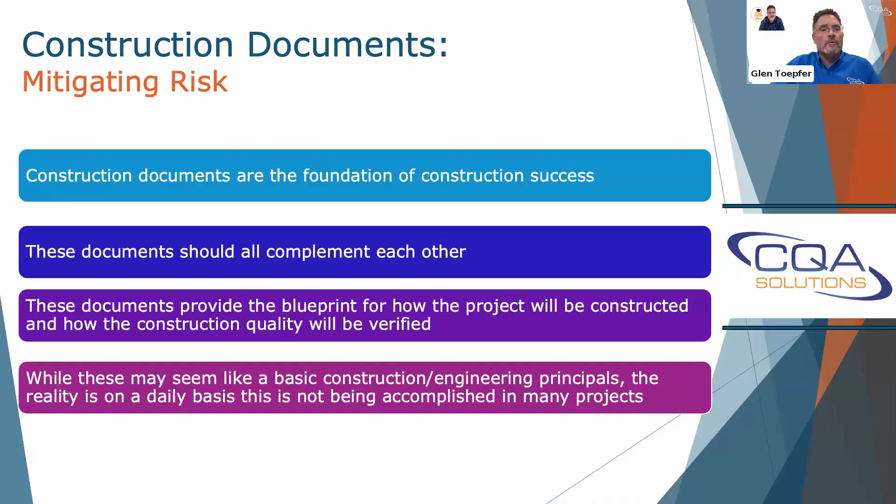And these seem like basic principles, but we're seeing them not being accomplished on a daily basis on a lot of projects. And as I mentioned, it leads to problems. Also, the importance of this guidance. These are quotes from over the years.

"The owner has pushed me to the limits of my comfort in certifying this project," from certifying engineers. "The regulatory agency approved it." "The owner isn't going to want to hear that we need additional work." So the regulatory agencies out there give their blessing to something, and something changes, and engineers are reluctant to do anything about it if it's changed.

And then, "If it's not in the CQA plan or technical specifications, I can't enforce it." That's a huge one. I hear that a lot, and sometimes I agree with it, sometimes I don't. But that's why we need to make sure some of this stuff is in there, because we're seeing a lot of issues come out of it.

Here's the different types of issues that we've been seeing on the construction documents: cut and paste, missing information, conflicts between the documents, incorrect information, and outdated documents supplied to the CQA firm and/or contractor. We've seen it all over the past year.

Missing information, this I really felt like it got worse, just because it seemed like we saw more of this on the projects on which we were involved. Batten strip details were missing on projects, specifications for the batten strip, how to attach it, how wide, what the material had to be.

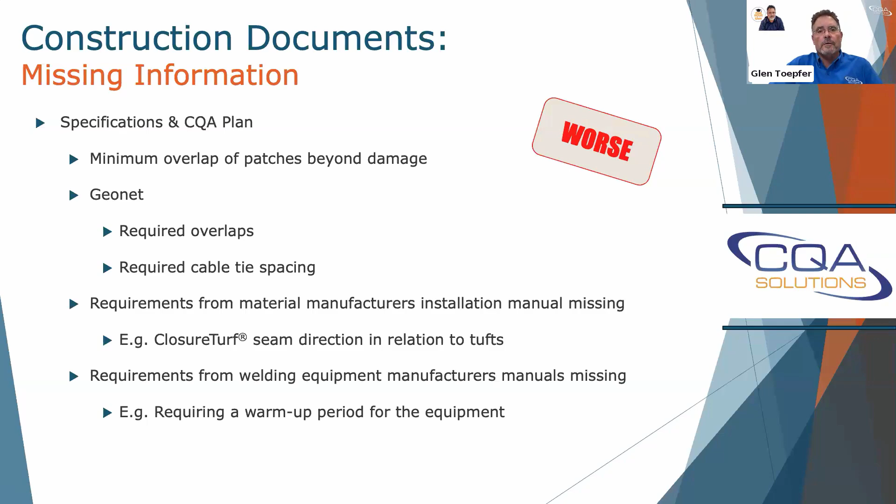Requirements from material manufacturers: ClosureTurf, seam direction in relation to the tufts. Requirements for the welding equipment manufacturers' manuals are missing in most cases. They're not even referred to, but requiring a warm-up period for the equipment. We constantly see people turn on the generator, grab the extrusion gun and go, and there's no warm-up. And you read the manufacturer's guidance documents, and they're supposed to allow it to warm up. I think it should be spelled out, and it'll help improve quality on the projects.

Conflicting information. There's no change, different information this year, I think, than what we had last year. But dwell time: technical specs say 2 minutes, CQA plan says 5 minutes. What do you go with? Air pressure drop, 2 psi versus 4. In trial welds, 2 peel, 2 shear; CQA plan, 5 peel, 5 shear. And destruct minimum frequency, 1 per 500, 1 per 1,000 lineal feet.

How do people review this? How do you certify it with these differences? It just seems to raise a lot of questions, and a lot of times it causes a lot of hassle in the field, especially when the documents don't match like that, and there's a big difference.

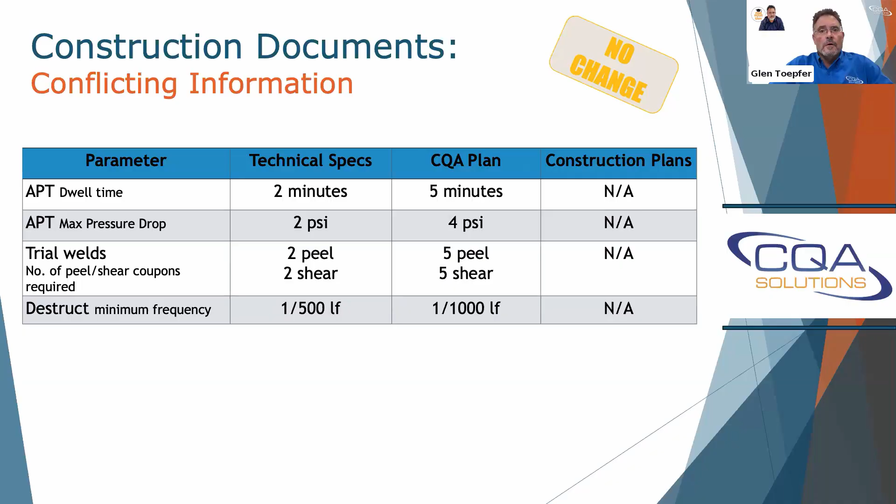Incorrect information and practices. Earthwork: we had a project or two where we had acres and acres of clay. One proctor was provided for a 300-acre project, and then the stockpile borrow was compiled from excavations spanning a decade.

Geosynthetics: for seam destructive sample failure, capping just a seam that failed was acceptable. Last year I think we had one where cutting it out was acceptable, like the destruct failure didn't exist if you cut it out. But these failures can go beyond just one seam, so these aren't the best specifications.

Fusion machines must be calibrated 2 times a day. What does that mean? I don't know what that means because the calibration is done by the manufacturer. Maybe they mean trial welds, maybe it's a typo. But how does anybody let that go? And it's put in there and people go through the project without catching that.

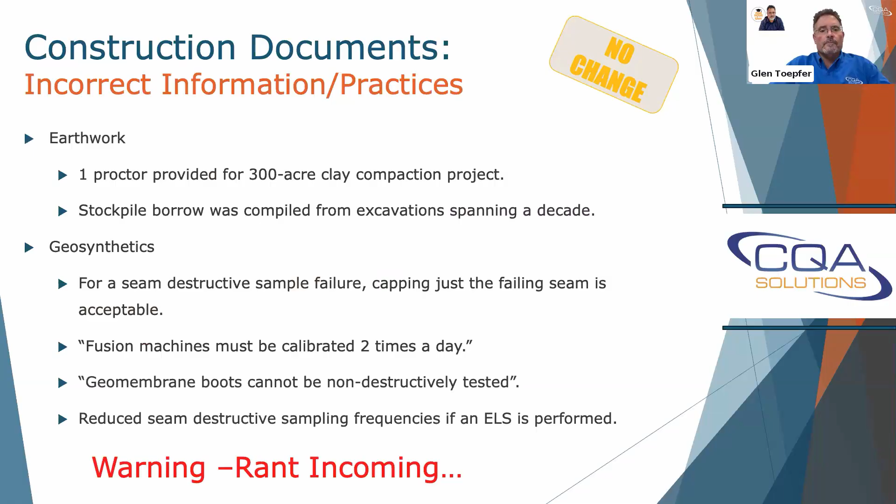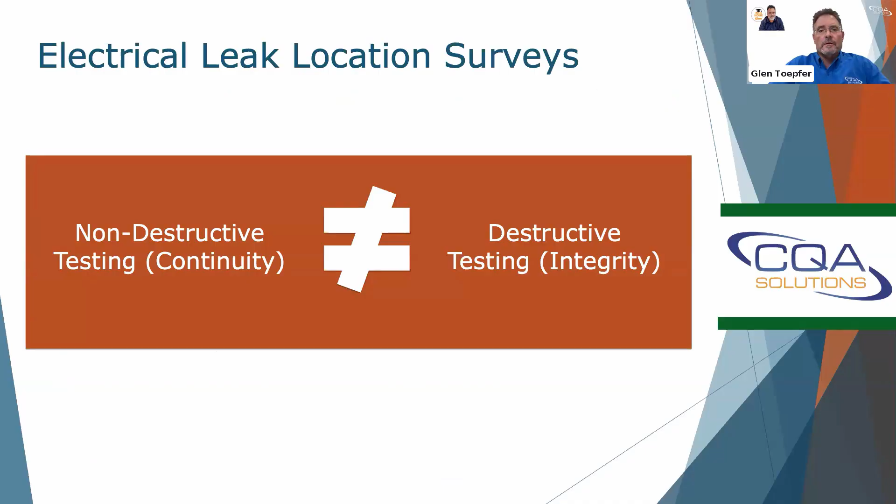Geomembrane boots are stated that they can't be non-destructively tested. And then reduced seam destructive sampling frequencies are allowed if electrical leak survey is performed. And, yeah, I got a rant on that. I've been saying it for years. Electrical leak location, non-destructive testing, continuity testing, which is an electrical leak location survey, does not equal destructive testing, which is your seam strength, the total quality of the seam. They're not equal at all, and we got to get this through to people so they understand this.

And I'll give my basic example, what I give in all our training classes. If you have a conductive backed material, 60 mil material, your conductive formulation is going to be roughly 3%, or 2 mils on the back side there, and your standard formulation is going to make up the remainder. So you could have a scratch or a gouge down 95% or so, even more. As long as it's not touching the conductive layer, it's unlikely to complete the circuit that's going to indicate that there's a leak.

So your integrity, your strength of your material is going to be greatly compromised. You got a scratch that's 10%, 20%, 30%. You're not going to get the same tensile strength and elongation and break strength. And people don't realize that. And so this stuff gets compromised because we're substituting a good technology, but we're substituting it inappropriately.

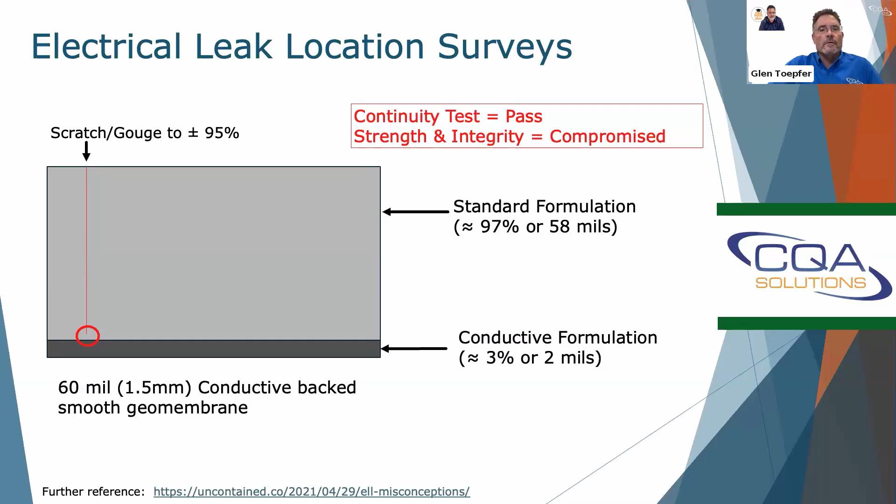Some construction practices, outdated practices that we see: topping of a failed seam is allowable in some specs, and it's largely outdated because you don't want to reheat. An isolated bead here or there we still see, but topping typically means you're going to be putting feet of extrusion down, so you might fix 20, 30 feet of a seam or something.

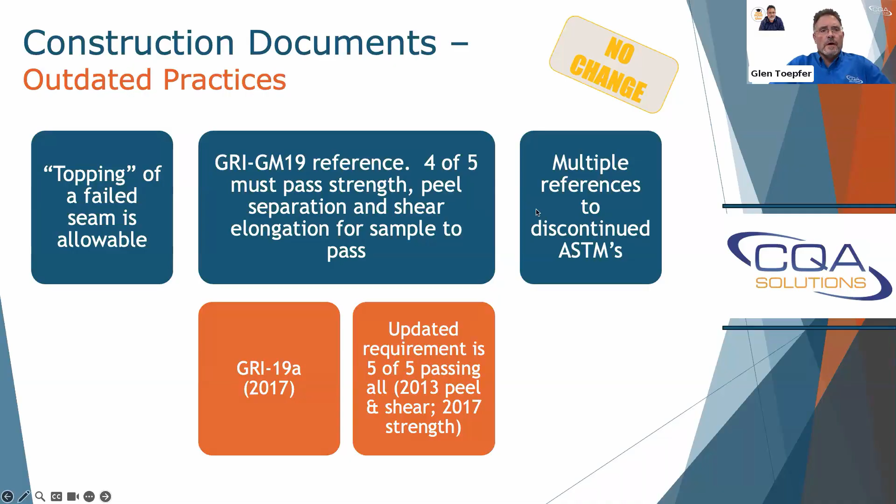Improper reference to GRI GM 19. It was changed back in 2017 to where it was broken up into A and B. And we still see the 4 out of 5 must pass peel strength, peel separation, but the updated requirement is 5 of 5 have to pass all. And it's been that way for a while. And it's still out there, and people are still interpreting it the old way, which I think just leads to quality issues in the future. And then multiple references to discontinued ASTMs. We continue to see that throughout the projects.

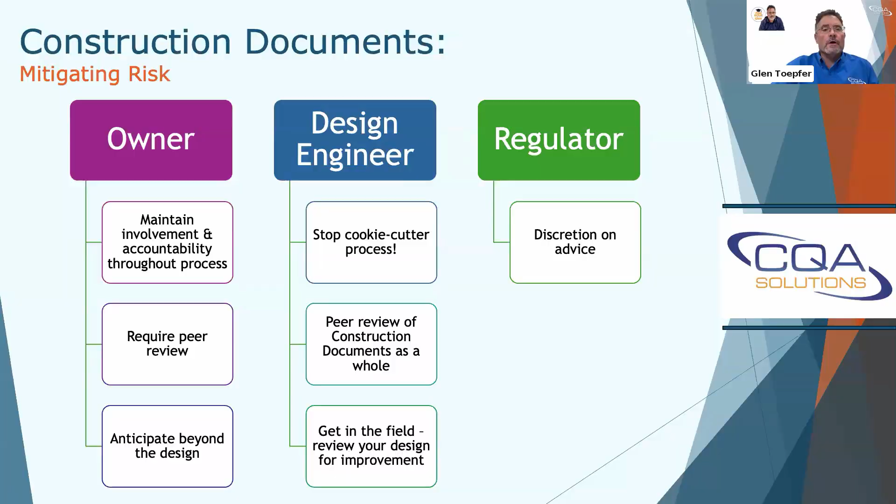And regulator, again, discretion on advice, see what the engineers actually know. If you're approving something, you know, they're gonna be reluctant to change their mind and go against what you're saying is good.

Project planning, pre-construction meetings. Some of the big issues we see here is that CQA is often left out, almost always, and relevant installer personnel are left out. There's no formal agenda, no site walk, and then you question whether parties have even reviewed the construction documents because of the aforementioned items. You see these things happening. How can we be partway into construction and be asking these questions?

Impacts, like I mentioned, you get delays, increased costs. An example, cold weather seaming, GRI GM9. It's not just plug and play. People get there and we're like, oh, we're down to 32 degrees or 40, whatever your cutoff is on the specs, and they want to implement GRI GM9, and there's things that need to be discussed by the engineer and approved by the engineer ahead of time.

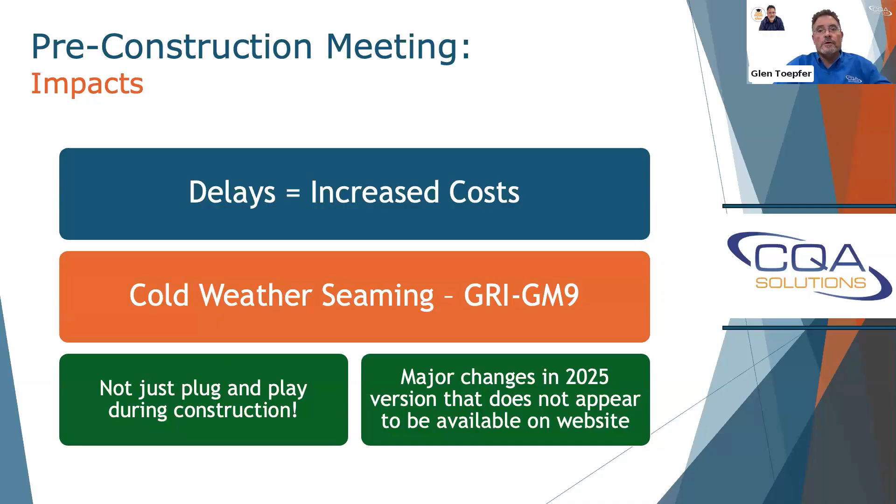And then also in 2025, there's major revisions, but I don't see that on the website last time we checked. So, is that out there for the public? I'm not sure. Some suggestions, obviously for the pre-construction meeting, include CQA and include installation foreman, come prepared with an agenda relevant to the project, come prepared with a summary of conflicts needing to be addressed.

At Palo Verde, where we had the zero leak project, I had pages and pages of notes, and they all had cross references to the CQA plan, the tech specs, RFIs, and we spent 3 or 4 hours going over it as a group with the installer, the owner, CQA, engineers, the whole team was involved. And that's how we got it to where everything was resolved for the most part before we're in the problem. You still run into some things here and there, but it was 99% resolved, and it made the project run much more efficient and increase quality.

Perform a site walk with all parties. A lot of times that can help avoid things like cutting the wrong materials at a tie-in, things like that. People need to know what the limits are.

Project planning, CQA staffing, we still have been seeing the same kind of CQA staffing issues, lack of experience, don't understand the role. There's a lot of people in the industry that don't understand the CQA role and they think it's just documentation. And there's people out there pushing, hey, we can replace CQA by data recorders, and that's not our job as CQA. Sure, we do gather the data, but the data is secondary. We have to be making sure that what's in the specs, what's in the plans, and what's in the CQA plan are being followed and done properly.

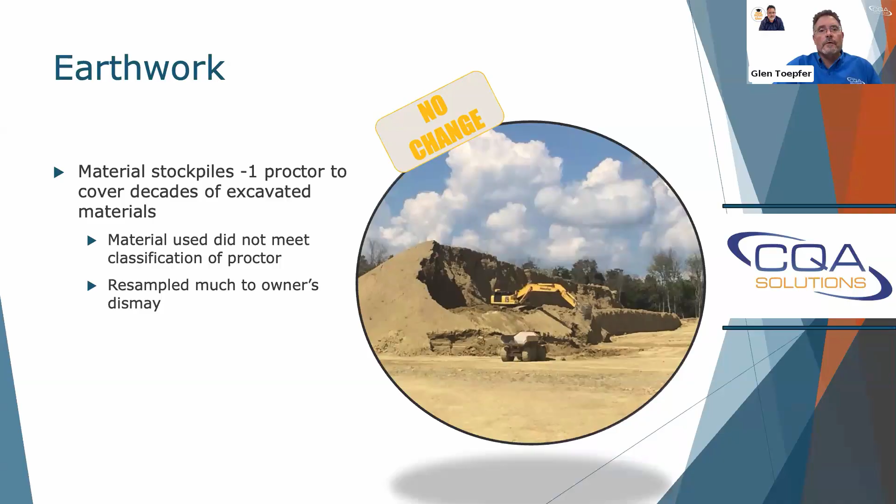As I mentioned earlier, as an example, we had the one site where we had one proctor to cover decades of material that had been excavated, and our people get out there and they're like, the classification doesn't even look the same, looking at a grain size just by hand, and we had a resample, and ultimately we had passing tests and things were working out, but the owner wasn't happy that we resampled, and I don't know how they couldn't have had other proctors out there on 300 acres. That's hard to imagine.

Earthworks, the communications, this is kind of a new development this year that we hadn't experienced: the contractor had insufficient material for construction. The certifying engineer was on vacation and the assistant engineer made a decision to reduce slope and the final grades, so that would help accommodate the contractor and the material that was on site. But the certifying engineer luckily got back before the construction was finished. And he said lowering that was unacceptable and they had to bring in more material and get it all approved. But communications and who's authorized to do what, that's critical. People all need to be on the same page and things like that shouldn't happen.

Desiccation, every year this is an issue. What we're seeing is no change in it. More and more people are starting to seemingly say, oh, your subgrade doesn't have to be perfect because we're doing a leak location survey. Again, it doesn't make sense. You want your subgrade to meet the requirements. Your clay should meet the requirements. If you have a permeability requirement and you have desiccation, that top several tenths of material is probably not going to meet the permeability requirement, and it has nothing to do with a leak location.

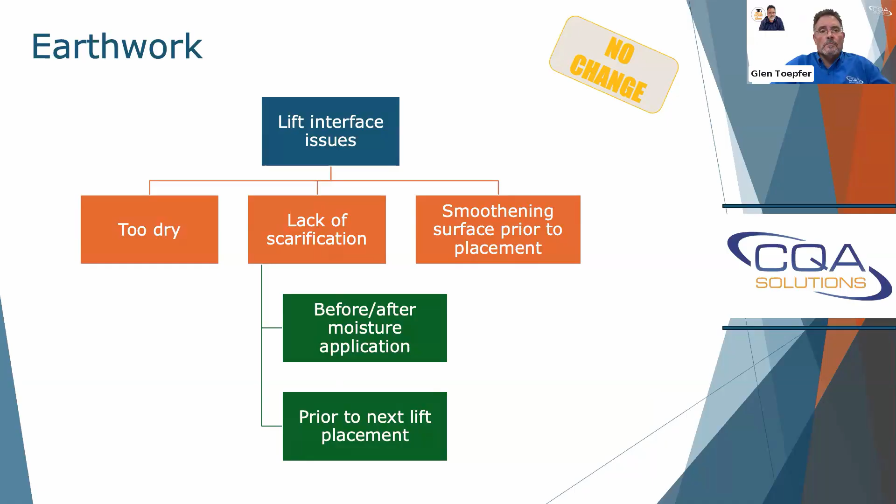Earthwork interface issues, we continue to see it all the time. People are placing too dry at that lift interface where the two are bonding together, lack of scarification, moisture is added sometimes prior to the next lift placement, but it's not worked in like it should be to get a uniform moisture. And so you end up with issues. And then smoothing is another one because they run over it with the hauling equipment, the smooth tires, and it doesn't get roughed up, and you end up with smooth clay that's not bonded between lifts.

Again, I mentioned earlier the desiccation. This is a big one - no moisture conditioning on holidays. You need to add this into your plan. A lot of contractors take off 4th of July, Memorial Day. They don't have anybody out there watering the clay subgrade, and it gets desiccated. They come back, add some water to the surface, roll it, and think it's all fixed, but it's not really fixed. You might not have the permeability there, and a lot of times you won't if it's sat and dried out for multiple days in the summer.

Geosynthetics, moving on here to geosynthetics, start with safety. On the safety side, we continue to see safety guards are removed from the tools. That's one. People sometimes aren't wearing the proper PPE when they're using their utility knives, but removing these safety guards continues to be a top issue in the industry. We want people to be safe, and this is one of the things.

Another one is proper crossing of anchor trenches. I didn't put a slide in here for that, but that's another one that we see quite frequently. Nobody uses a bridge, people still jump across it, and that's a big risk for getting hurt.

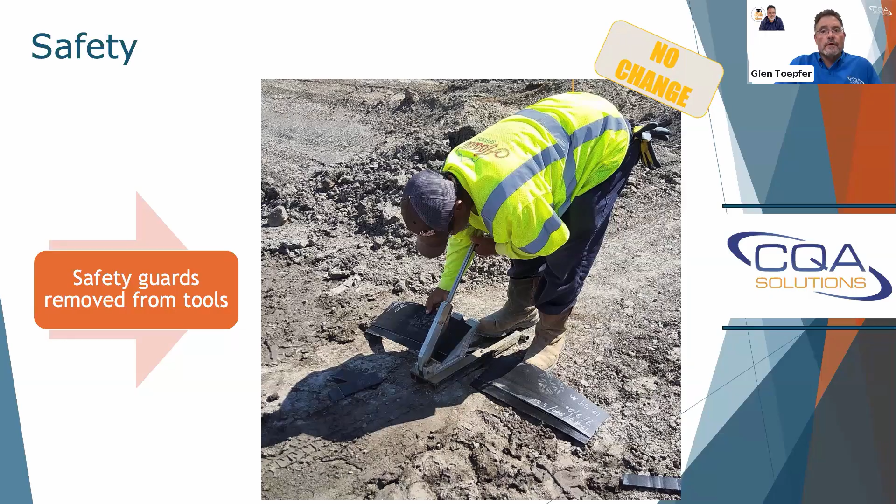Communication - surprise, there's more liner crews on site the next day, and it still continues to happen. It's been better on some of our projects, but overall, feedback from people is that it's still ongoing, and you can't assume just because they put more people out there that those people know the specifications. Firsthand experience, a lot of times those crews don't know the specifications. I've had some major issues where they come out, bring more people, try and do something, and it sets them back a week because they did it wrong, and now we got to redo stuff.

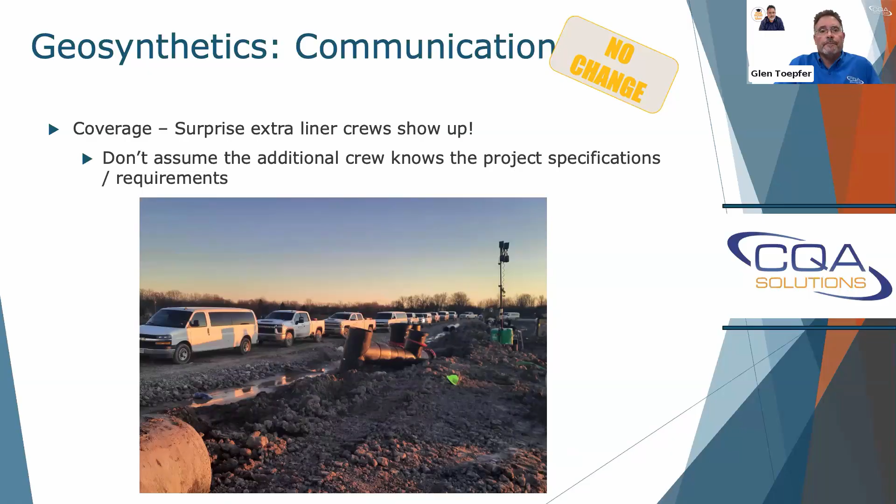Geosynthetics communications - the CQA personnel in the field, what we're seeing is they're not provided with an approved inventory list, not provided with approved panel layout drawing, so they can't enforce these things. No specification summary, or they do have one and it's missing information, or it's improperly prepared. We see that they're missing field equipment such as measuring instruments, missing their field forms, missing electronic tablet. If they don't have these resources, how can they do their job? They can't. And it's a shame, but we're seeing this stuff in the industry. We've got to be better prepared and rely less on the installer, especially when you're CQA anyway.

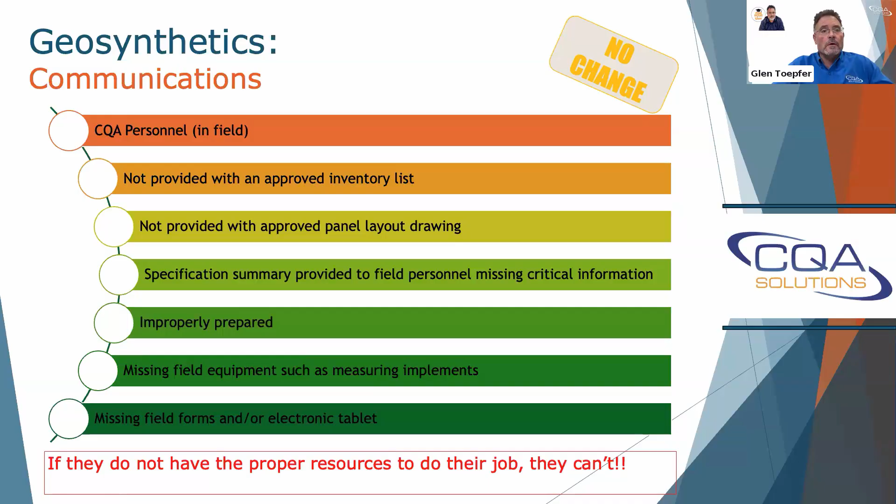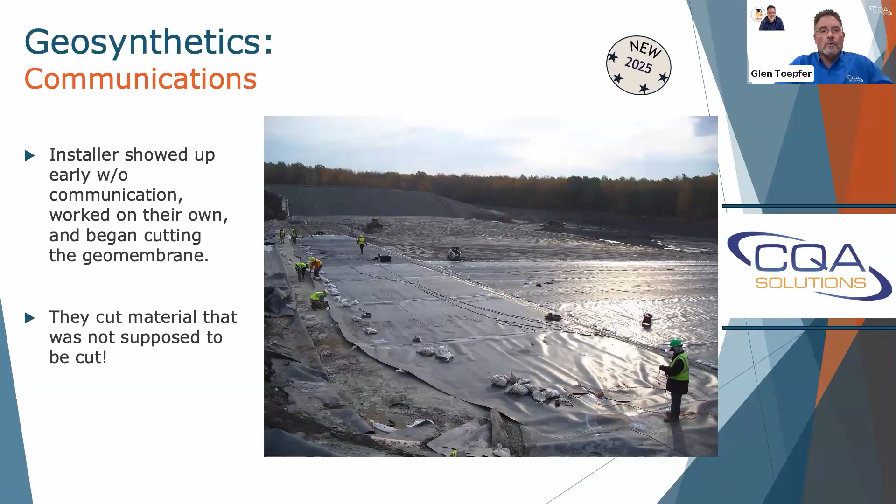We had this project here - the installer showed up early without communication. They worked on their own, began cutting the geomembrane. Turns out they cut material along the tie-in they weren't supposed to cut. And that's where it goes back to a site walkthrough, making sure you have all the proper parties there during the pre-construction meeting, so that way this stuff can be identified. They should notify somebody if they're going to be doing work anyway on a certified project, but they didn't.

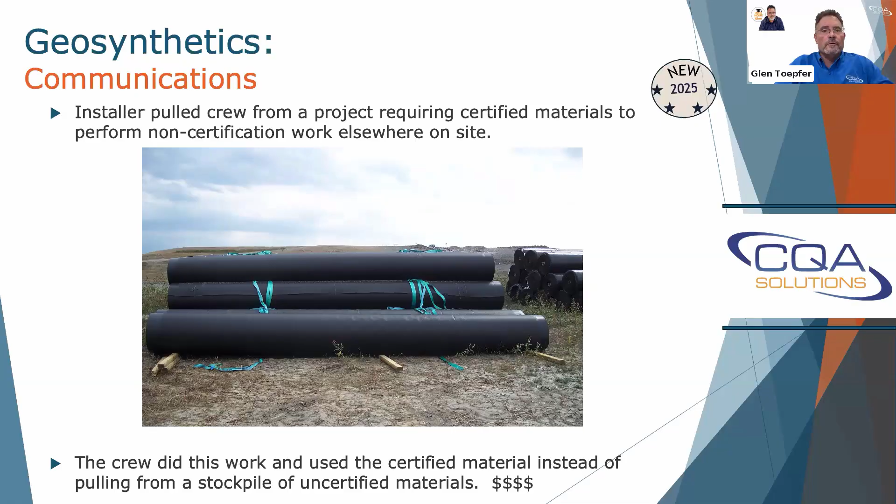Same thing, several times we had installers pull a crew from the certified project we're working on, doing CQA oversight, and they went to do non-certification work elsewhere where CQA technicians weren't needed. In one case, they did this work and used the certified material instead of pulling from the stockpile of uncertified materials. That cost the owner a fortune in getting new materials that had to be certified, and caused delays in getting that material.

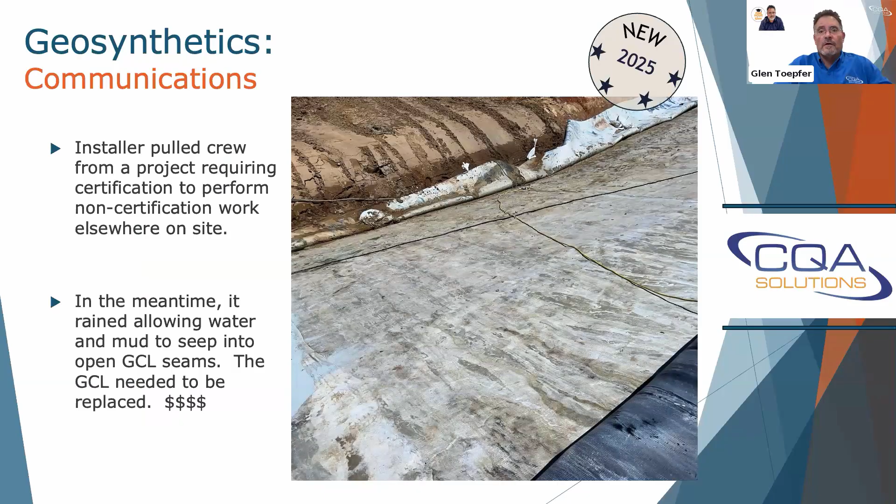Similarly, they pulled the crew on a different site, and in the meantime it rained and they got mud and silt in the GCL, and they had to replace the GCL. Again, a costly mistake, and that should have been prevented. Everything should have been battened down before they left and went to the other part of the project.

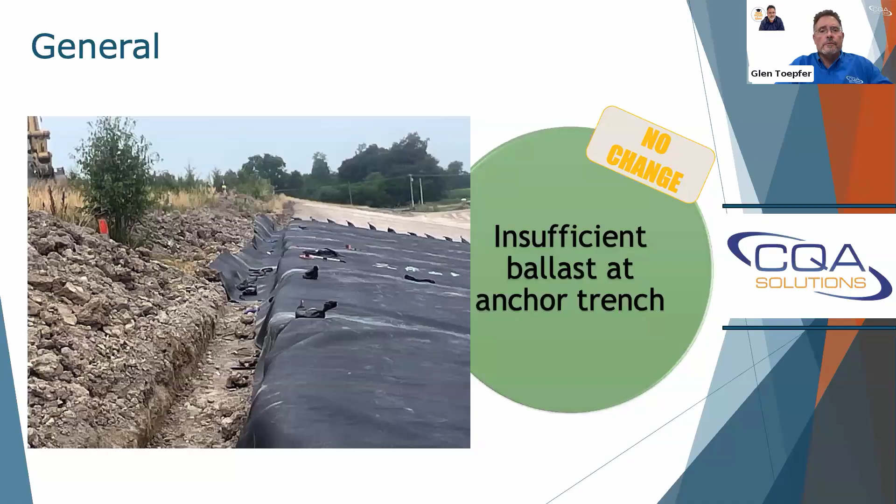Insufficient ballast at the toe of the slope - we continue to see that. Same thing with the anchor trenches. Rub sheets, no change here. They're rarely required on CQA plans, and a lot of times you see people aren't using the rub sheets, and a lot of this incidental damage that occurs on geomembrane projects could be avoided with the use of rub sheets. You're not going to get it all, but everything we can reduce - the amount of damages is the amount of repairs - increases the quality of your project.

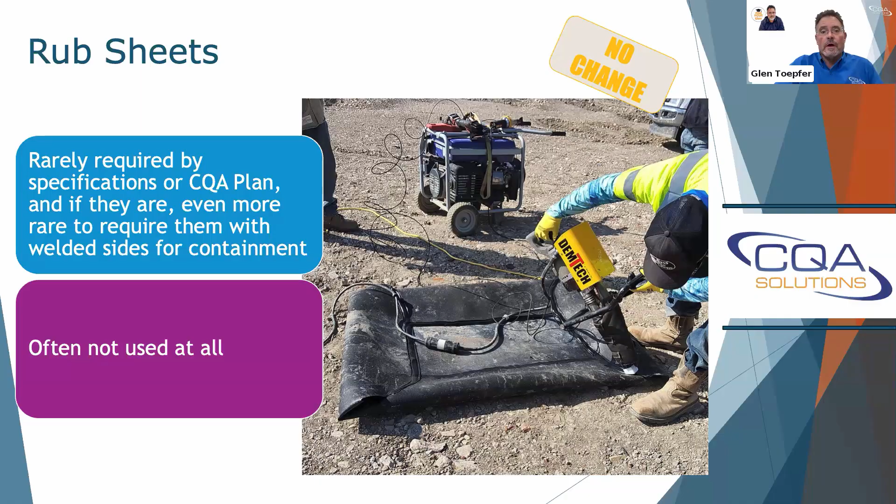And I think the containment sides help. If you get a spill, you don't want the gasoline or something going on the geomembrane. We've seen funky things happen with generators from time to time where they start spewing stuff.

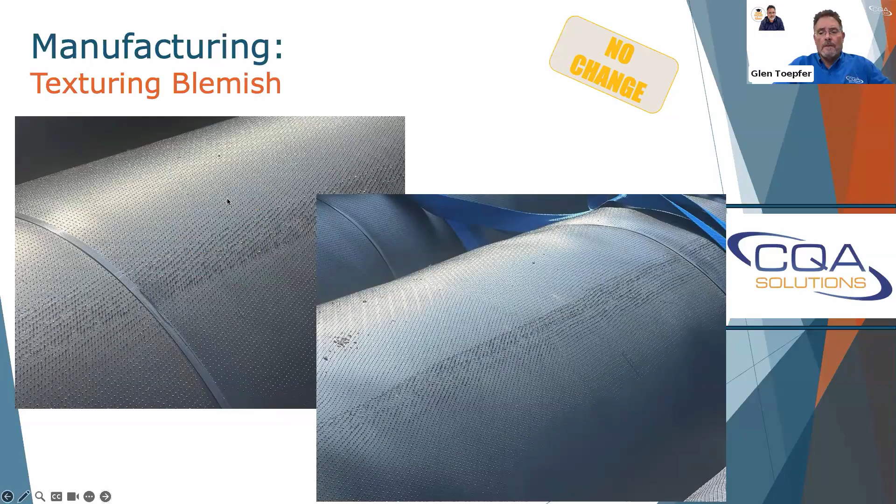Moving on to manufacturing, we still see blemished material. I think you're always going to see blemished material just due to the construction processes.

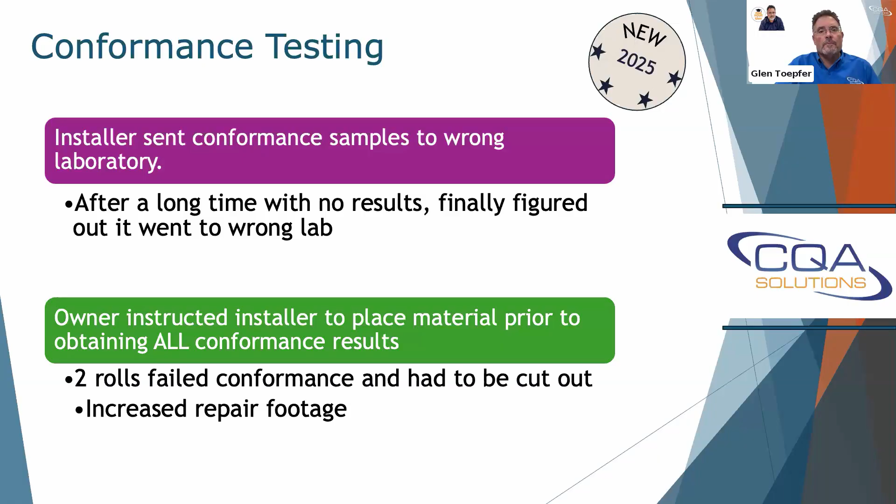In the meantime, the owner instructed the installer to place material prior to obtaining all the conformance sample results because they were tired of the delay, and two rolls ended up failing and had to be cut out. At least they caught it and have to replace the material, obviously. But when you cut them out of a liner system where they're already seamed, now you're going to need repairs to join them together because they're not going to fit together. You're just adding more seams and more potential for quality issues.

The offloading and handling, another one here is proper storage. There are skids under here, you can't see them but they're under there. They did repair the ends that were damaged to try and protect them from UV damage. They could have done a little better job, but they actually seem to be a little better off on the projects we were seeing, working on tarping material, protecting material, things like that.

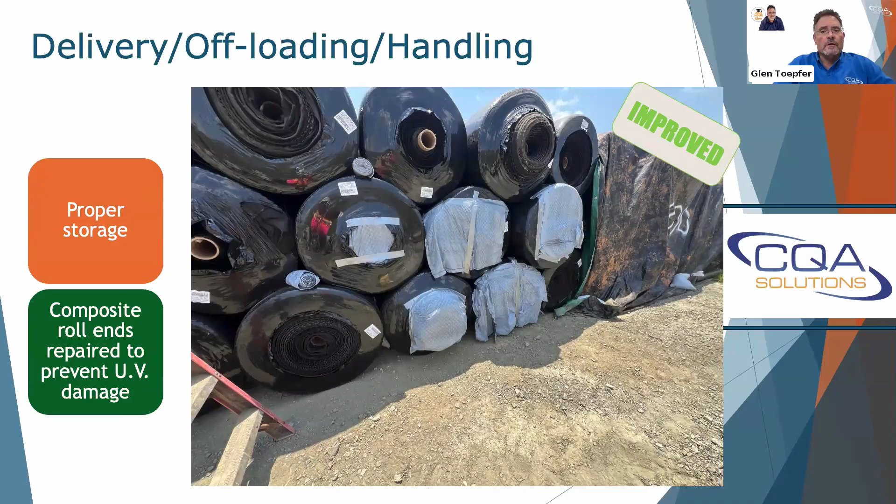One of the big head scratchers though is when it comes to inventory. No one knows how much material was ordered, and this is baffling. Smaller projects, we haven't seen it as much as the larger projects. We start getting the larger projects, and somebody's got to know how much material's there, but nobody knows. You go to a weekly meeting and nobody knows.

You start adding in rejected material - nobody knows the quantity of rejected. Has it been replaced? Has it not been replaced? It's insane, it doesn't make any sense. How can you even make sure you have the right amount of conformance samples if you're not tracking the material properly that's coming to the site? And we had two projects where the contractor did not order enough material, and of course both were short and experienced unnecessary delays.

We hadn't seen this one for years, but it cropped up again this year. What happened is, they performed the trial welds with a large generator, meeting the equipment manufacturer's requirements, then they switched to the small generator for their production seaming and did all their production seaming with it. The owner ultimately allowed this to proceed. We went to the engineer, and the engineer went to the owner, and the owner overruled him and said he was going to allow it, and he said we'll go by the destructs.

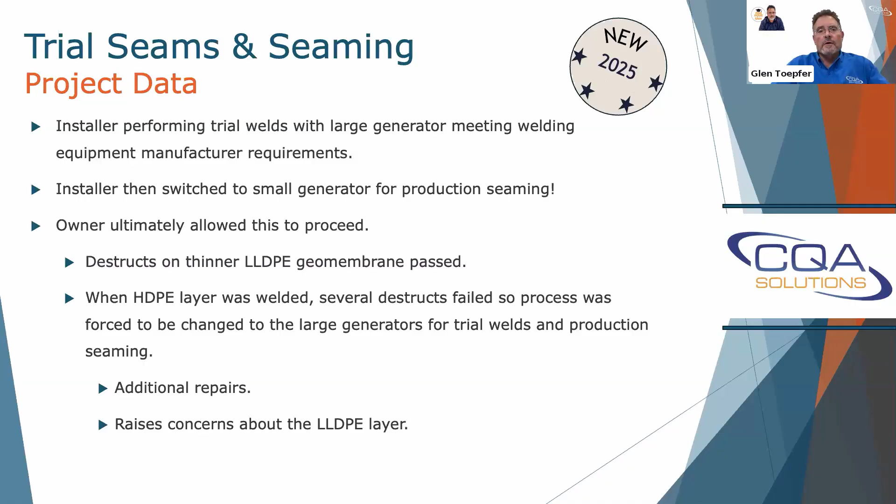Anybody that knows me knows that I argue against data recorders in some instances, not necessarily a proponent of data recorders on everything. But this is an area where if we were recording voltage, we could have checked that, so it's a plus there where it's something we could use it for. You can check out some webinars from last year on that.

This is a project data, 3.2 acres. We had the HDPE wedge weld, original samples 21, five failures, so there was a failure rate of roughly 24%. But again, all the failures showed up at the beginning of the project.

So they did switch over to a different generator, the big generator. But in the meantime, we had tracking samples on those seams. There were 15 tracking samples, 13 failures, an 87% failure rate.

And if you look at the footage statistics, we had 6,500 total feet of fusion welding. Failing fusion welding was almost 1,100 feet, so 16.7% of that failed, and that resulted in repairs.

So we suggested that they fusion weld the repairs, and they went with extrusion welding instead. So total extrusion welding on the project for all the repairs and any seams was 3,000 feet, and failing fusion repair...

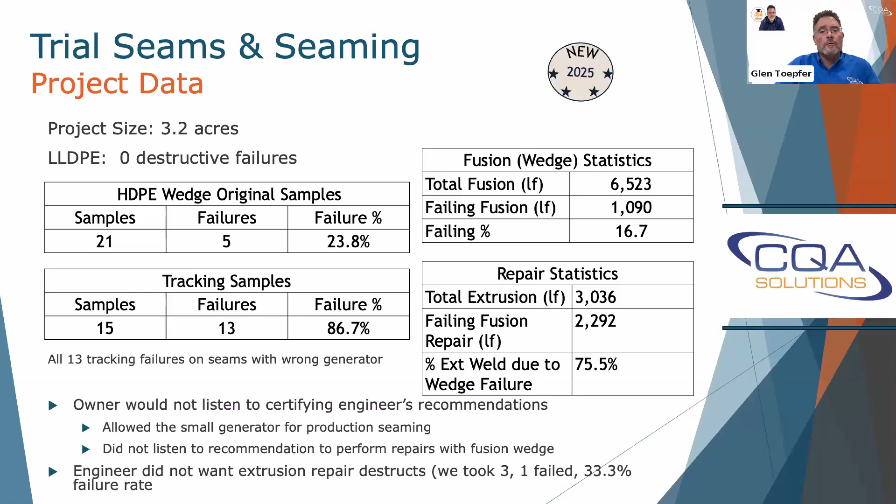So a follow-up question here is, how can we change this? This is really something that needs to be discussed in the industry. How can we change this? The certifying engineer didn't want to go against the owner. Could the certifying engineer refuse to certify the project if the owner doesn't listen? How many of you are willing to do that? How many of you have what it takes to stand up to an owner and do that?

When I started in the industry, I was blessed. It must have been a God thing or something, because I was in a room across from the president of Hall and Associates, John Hall. I was rarely in that room, but I was there, and he was in a conversation with a client, a guy named Jack, I think. They were arguing about the project. I could hear him—it got heated.

And John ultimately said, I'm the certifying engineer. If I'm going to certify it, you're going to do it my way, or I'm not going to certify it. And they did it his way. I mean, that's all it took. But that doesn't seem to happen. And I think that's something that needs to happen—we need to have more of a backbone in some instances, and you need to work with the owner and help them understand the issue. Anyway, I could rant on that, but I'm going to move on here because we'll be out of time.

Moving on to trial seams and seaming, there's a few things here. We occasionally see sweat dripping from the extrusion welder's forehead into the seam area. That one was new, I didn't have it last year—we hadn't seen it in a while. People were doing pretty good, we'd get moisture, but not from the sweat. And that led to some poor seams that had to be repaired.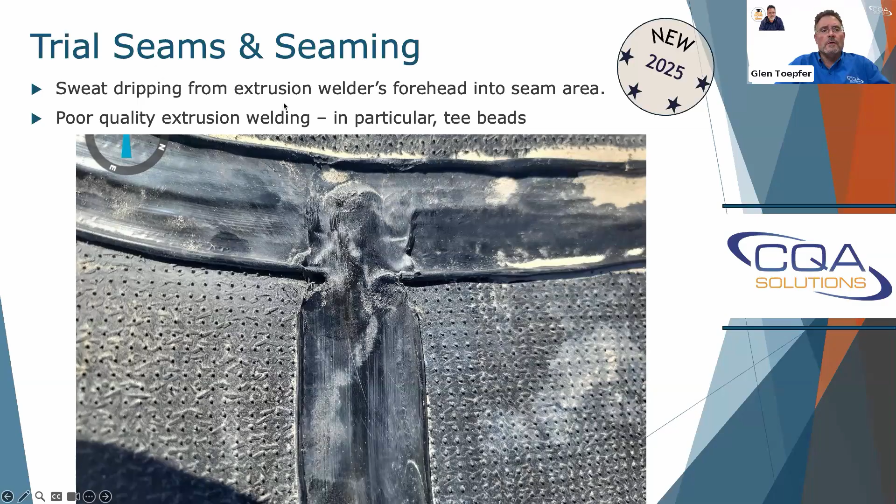And then, fairly common is poor T-beads. You really got to keep an eye on the T-beads. Your tensiometers—we continue to see this all over.

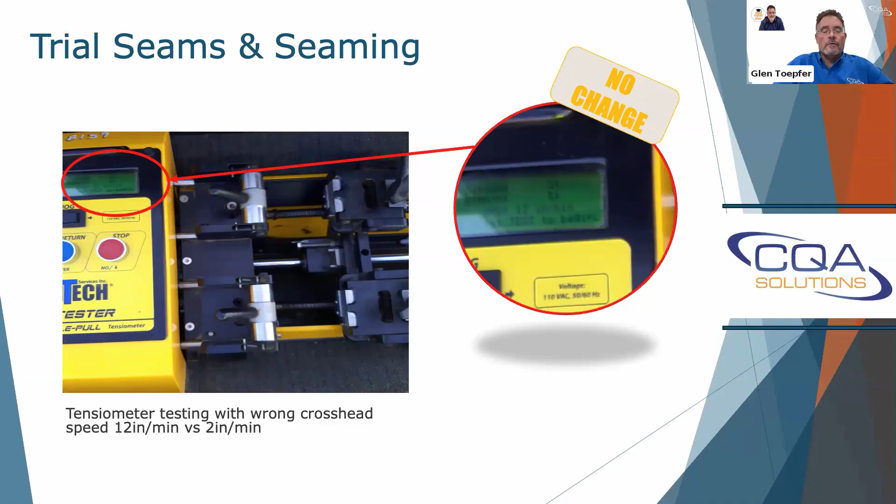Testing with the wrong crosshead speed. In this case, it was supposed to be 2 inches per minute for HDPE, and they were running it at 12. I'm not even sure what the 12 is, maybe PVC or something. I don't know offhand, but I think it's usually 20 for LLDPE. But anyway, that aside, it was wrong. A lot of people don't catch it, and it'll impact your values.

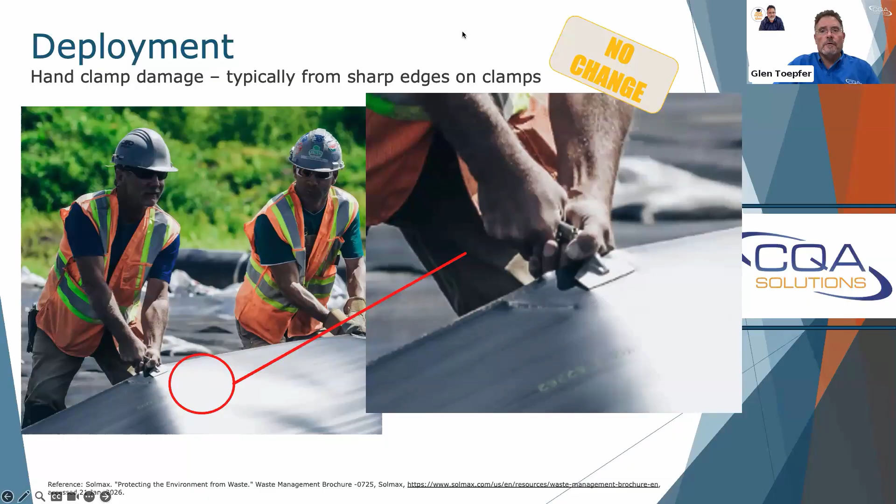And it impacts your values in the field, then you could end up with failed seams because your values were skewed. Deployment, hand clamp damage - this is an image I took from a manufacturer last year. It's still there as of yesterday, and I use it to point out, I don't think manufacturers should be promoting bad quality, but yet they are. You can see here they're doing their hand clamp, and here's damage shown right there. That happens all the time in the field because these hand clamps aren't rounded. We continue to see that as a big issue, and they result in failed seams and things that go undetected.

Trial welds - we see both the QA and QC don't inspect the coupons. And then the QC a lot of times don't know the required values. Part of that is nobody's relaying it to them - they're not in the pre-construction meeting. A lot of times they don't speak English, or if they do, it's poor, and nobody's communicating the values to them. So it's not necessarily their fault. I guess they should take it upon themselves to get the values, but they're moving from job to job, different material to different material. So somebody needs to make sure that it's correct, and a lot of times it's not.

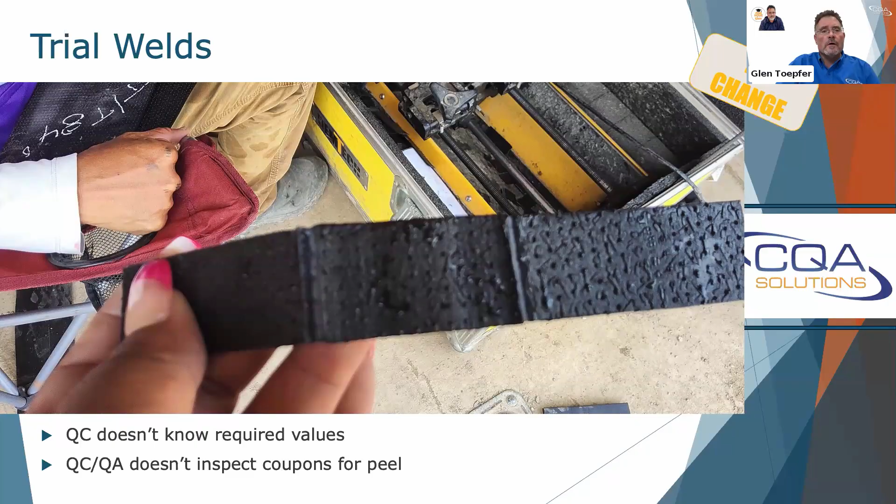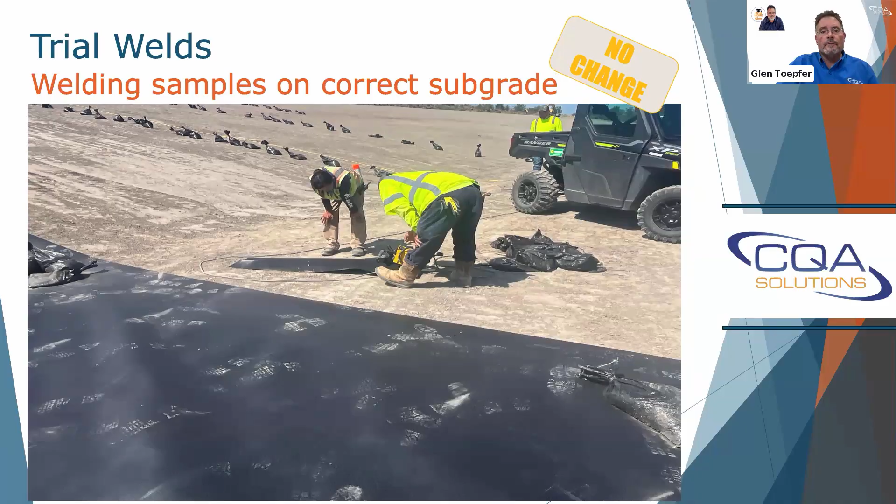Welding samples on incorrect subgrade - we consistently see that. And on the flip side, we consistently see people welding on the correct subgrade. So incorrect and correct subgrade, you'll see it both. It just depends on the liner crew sometimes. You just want to make sure that they're doing it on the correct subgrade.

Here's one we continue to see too. A lot of people don't believe this, but installers will deliberately park their trailers sometimes where they'll do their testing and have it face away from the work so that if you're in there as a QA, you can't see what's going on. And they may run a trial weld in the middle of the day just to get past CQA, especially if you're staffed with only one or two people. It's a trick of the trade, and we continue to see this, many times by design.

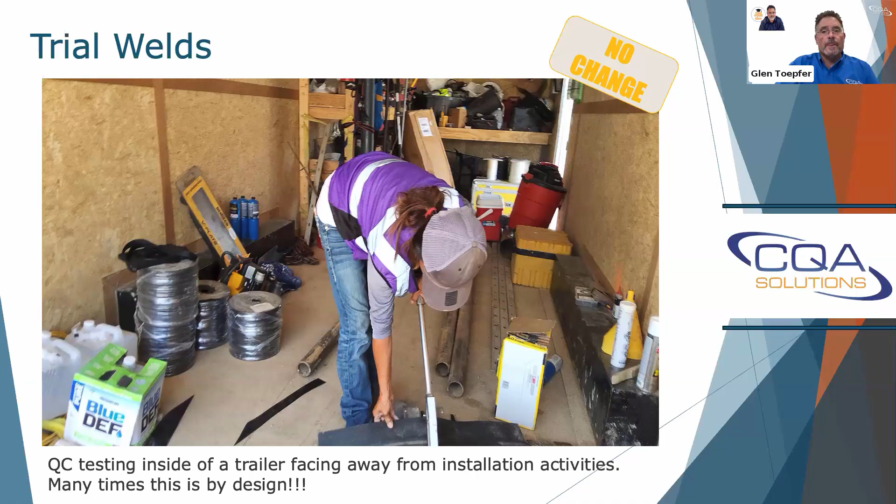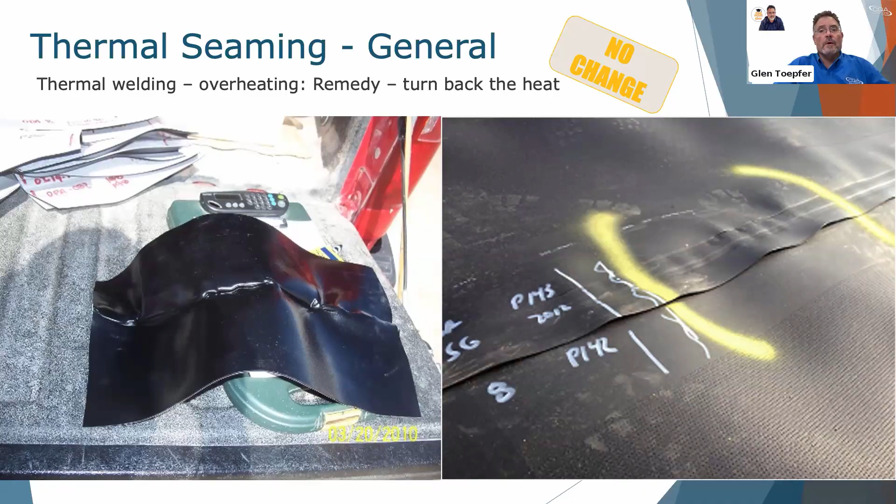The overheating - again, this is an issue I've been talking about for several years, and we continue to see it. You have your overheating of the liner because it's going to pass peel and shear by overheating it. The remedy is to turn back the heat. People don't want to do that because they risk failing peel and shear, but we're doing more damage in the long run by overheating it. There are some installers out there - kudos to you guys - who are doing this, turning back the heat and trying to minimize it, until we come out with some kind of better guidance in the industry regarding that.

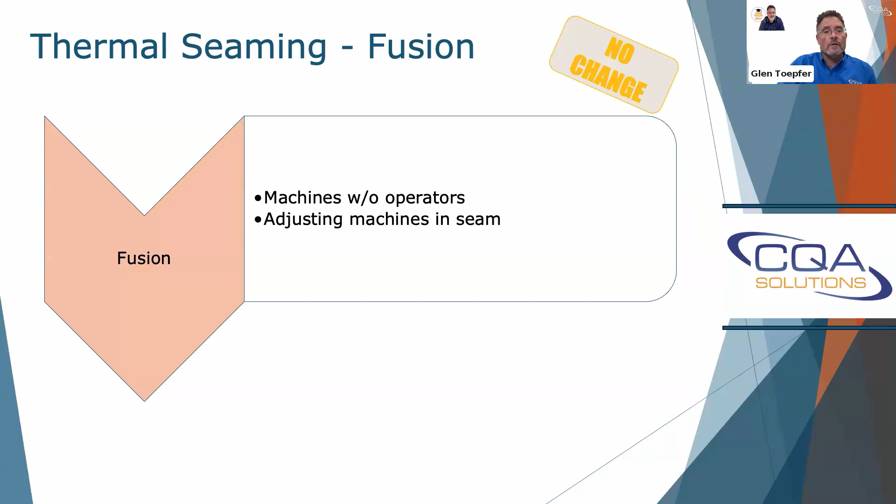Again, machines - thermal fusion, the wedge welder - machines without operators, and you'll see people adjusting the settings in the machine while in the seam. Here's a photo from last year. I didn't have any updated photos, but we catch people doing this. This is another good application of a data recorder - you could actually catch if somebody's tweaking the machine settings.

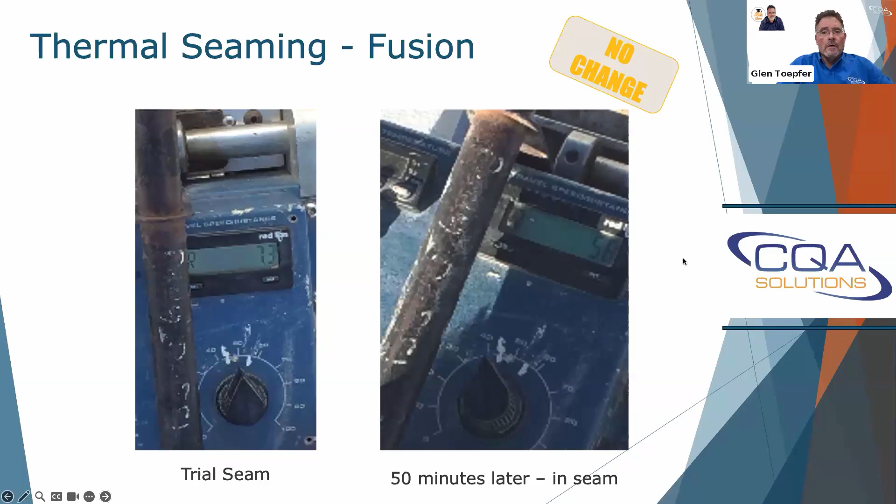While they're in the seam, here you can see the trial seam was this setting. 50 minutes later in the seam, it was this setting - obviously different, same machine. And that shouldn't be happening. I know you have to adjust them sometimes within the seam for wrinkle conditions, but then how are we justifying that that's passing? That's what we need to figure out too as an industry, because there does have to be some flexibility there.

Thermal seaming, extrusion welding. Forgetting the bevel, wrong welding rod. I got some pictures of all of these off-center welds, poor grinding. Insufficient overlap was one I think we added this year, but you pretty much see it every year. These things happen, and hopefully someday we'll get away from it, but it depends on your crew, the experience of the installer, sometimes the motivation of the installer, and the type of project they're on, unfortunately.

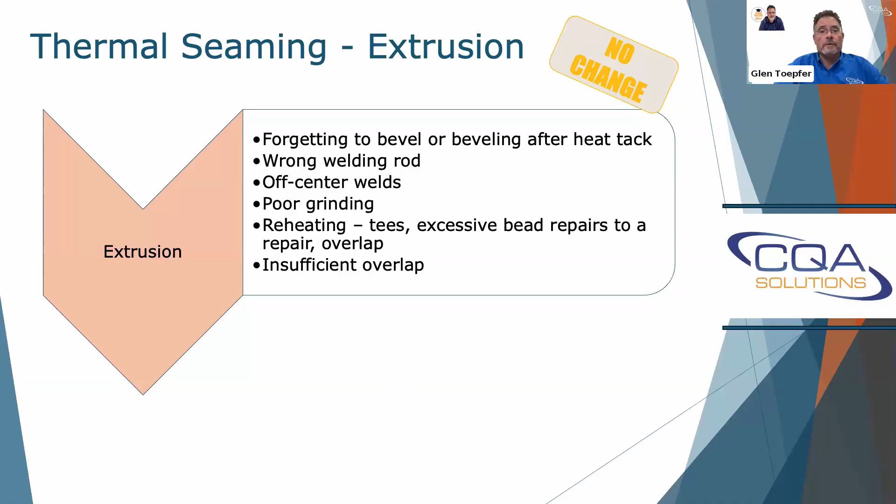Just some pictures here for forgetting the bevel. You can see there's no bevel on the liner in this picture. Wrong welding rod - I forget which case it was, but they were using LL on an HD, or HD on an LL, I forget which one it was.

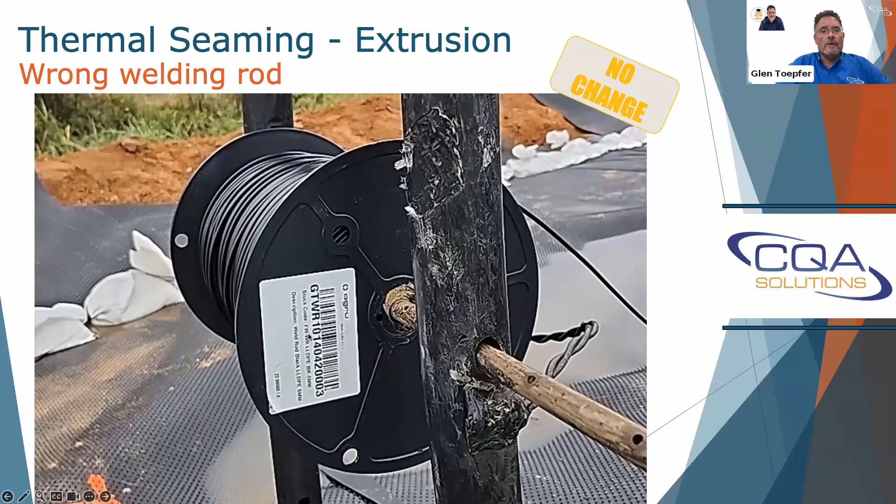Thermal seaming off-center - we continue to see off-center welds. Poor grinding, we continue to see that. This is a several years old photo, but we've seen stuff similar to this in the field this year, and you shouldn't be seeing that.

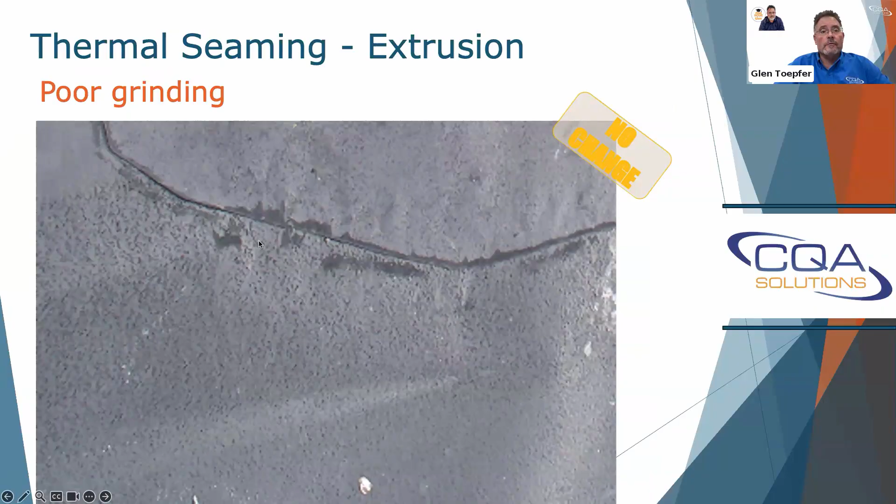Reheating tees, reheating anytime you're overlapping on extrusion. You shouldn't have this conglomeration of overlapping patches. Each one of these overlaps is where they reheated the area. You're more likely to leak at these tees. You can see they probably welded over wrinkles, they might have a fish mouth in there. Pretty shoddy work in my opinion, but they should have cut this out, gotten rid of the wrinkles, and replaced it with one big patch. Then you don't have all those overlaps, and you have a better integrity product by not having those overlaps.

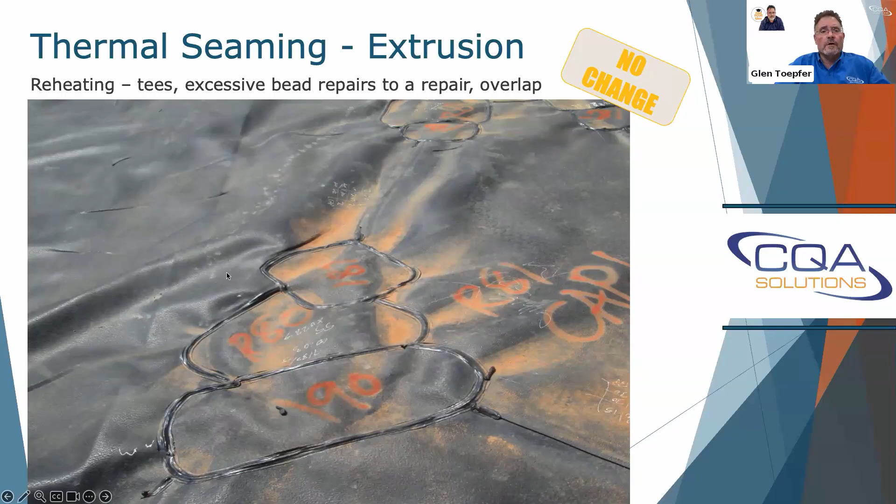Air pressure tests - this is common too. We continue to see wrong dwell times, wrong starting pressure, especially when somebody still specifies 5 psi, and a lot of the equipment, the shop vac motors, can't pull that. They can only pull 2.5, 3. So the revised ASTM has 1 to 4, but some people still require the 5, and you need a Venturi system, so you'll see that a lot. Or I'm sorry - I'm on the wrong one, I thought it was on vacuum, but this is air pressure testing, yeah, the dwell time, the starting pressure.

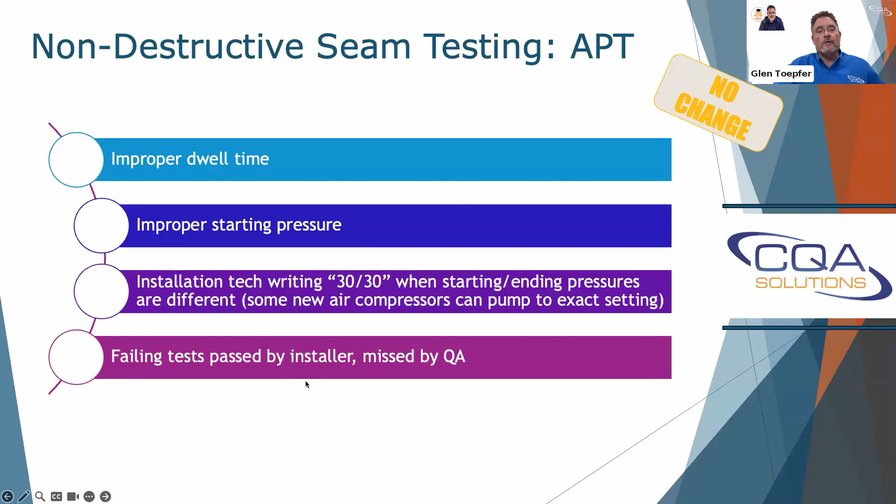30-30, you see a lot of people write that. It used to be a big issue, and it still is if they're writing 30-30. You need to verify what they have. We see people write 30 and it's 27, or they write 30 and it's 35. Some new air compressors can pump to the exact setting, so you need to be mindful of what equipment's out there. So I can't make the general statement that 30-30 is bad anymore, but people need to be looking at it - failing tests passed by the installer, missed by the QA.

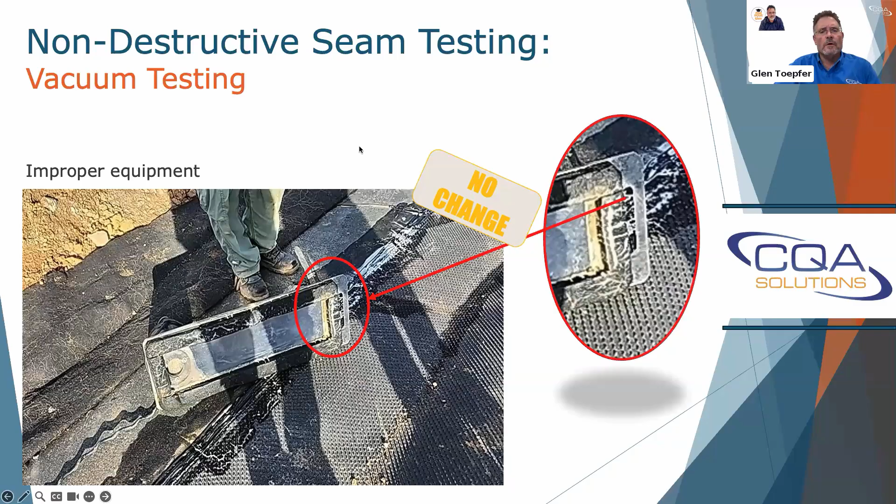Now I'm on vacuum testing - I was looking ahead to this one. Improper equipment: you have your gasket here, and it's all torn up, and you get leaks in the gasket, and it's not getting a good seal, but yet people are saying these tests pass, and a lot of it's because the operator doesn't have a clue what the leak looks like.

That's a big one, we see no change. The vacuum test operator is typically going to be your lowest man on the totem pole, so they don't know what they're doing. So we always recommend a blind leak, and I'll get to that in a second.

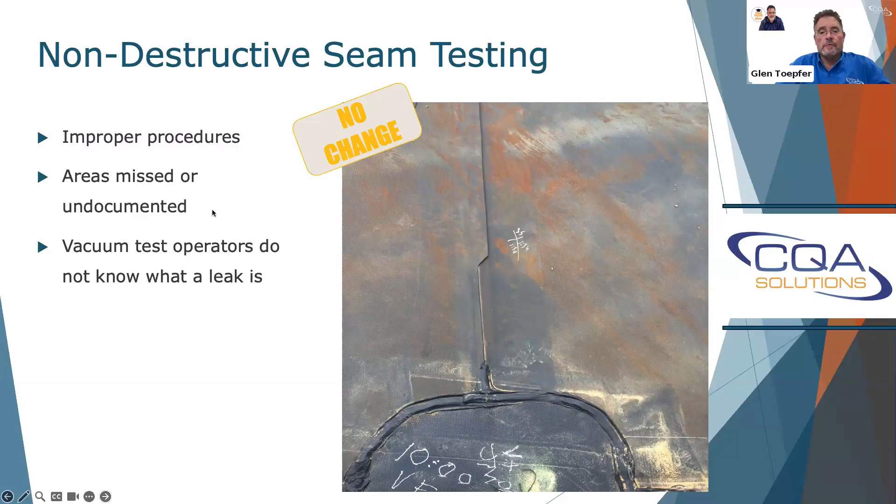We see a lot of areas missed. You can see by the imprints here that areas were missed of the seam. They weren't tested, and that's just sloppy work, but probably improper training as well.

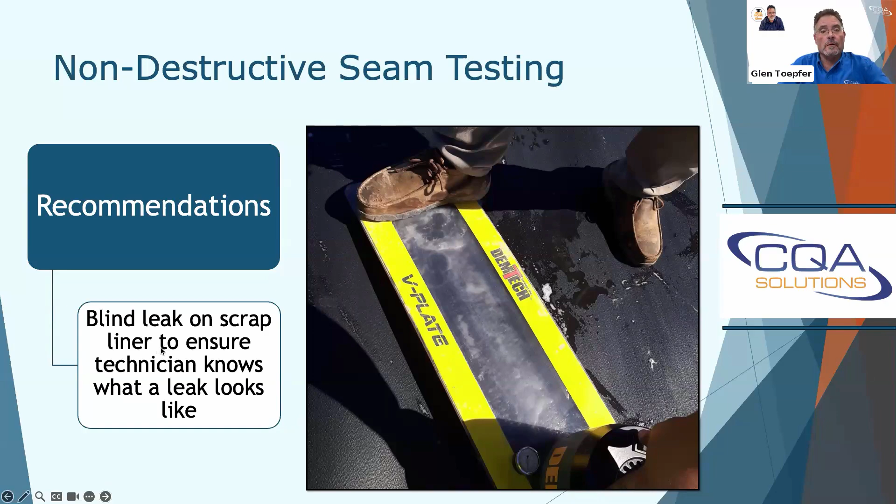Doing a blind leak is one of our recommended practices to ensure that the technician knows at least what a leak looks like. Sometimes it's eye-opening, they never knew, nobody told them. They've been doing it for 3 months, and their eyes are open, and it's mind-boggling to see that happen when you're out there.

Destructive seam testing, this one's another one that kind of boggles your mind. To me, the requirements are meaningless. If you're just going to wheel off 500 feet and mark a destruct, it's meaningless. You're just putting extra holes in the liner. Your chances of finding a problem are much lower than if you're looking for a problem and using destructs strategically. But we've seen failing tests are not identified by the CQA engineer as well.

So we suggest using the destructs wisely, minimize the frequency when possible. And then, I believe extrusion seams and repairs must be part of the sampling protocol because the failure rates are so high. And you can look at past webinars on that last year where I go into that more in depth. Some other issues we see, marking samples, I mentioned at 500 feet. This has been a big one this year. We've seen a lot of people allowing the installer to pick destruct locations when they're doing third-party CQA.

We've seen a long turnaround lag time between welding and results because the installer doesn't cut them out until 2 weeks into the project. And now you have a bunch of failures. You need quick feedback. The quicker the better. If you can get next day feedback, that's a good way to do it. Even on the larger projects where people have an on-site lab, that works great too, because you can get feedback almost the same day or next shift. And you want that quick turnaround so you minimize the amount of failures.

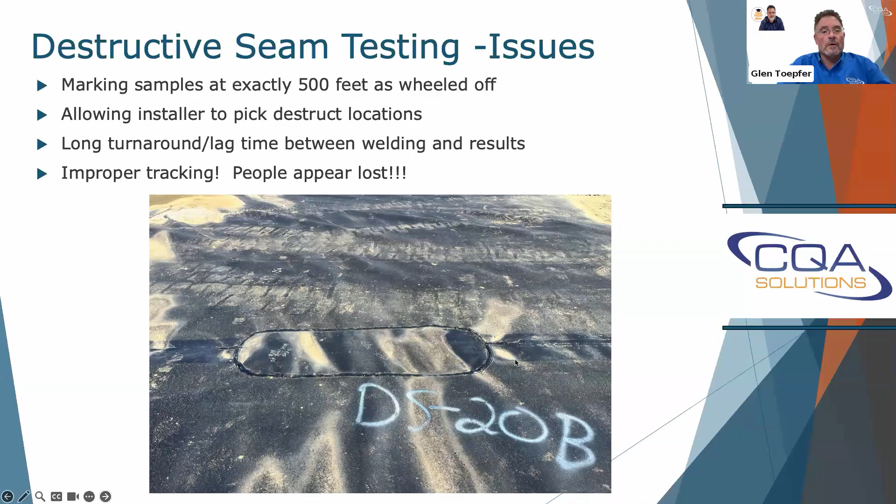Then improper tracking. People just appear lost in this job. It's strange. And this is a photo from last year, but we've seen it again this year where this is obviously they're sampling. You look at the paperwork, it's the B sampling on a failure. No repair is done to the seam. There's nothing there. They just left it. Okay, it passed. I assume it passed. I don't remember, but assuming it passed, there should be a repair extending from this location in one direction or the other, but there's not.

So what do we recommend? Using the destructs wisely, avoid critical areas such as flow lines, sumps, high stress areas. People that are wheeling off 500 foot exactly tend to stick them no matter where they fall. A place where defects already will be required. Minimize the number of additional repairs and holes by doing that, such as at intersections or there's a burnout. If you stick a destruct next to the burnout, you don't have an extra hole.

Have flexibility while meeting the requirements, ensure all operators, machines, and interfaces are represented in testing. We're seeing a lot of different issues this year. Either they're only tracking it by machine and they're not paying any attention to the operator, or interfaces are totally missed. Give the installer the option to repair something rather than sample at a location.

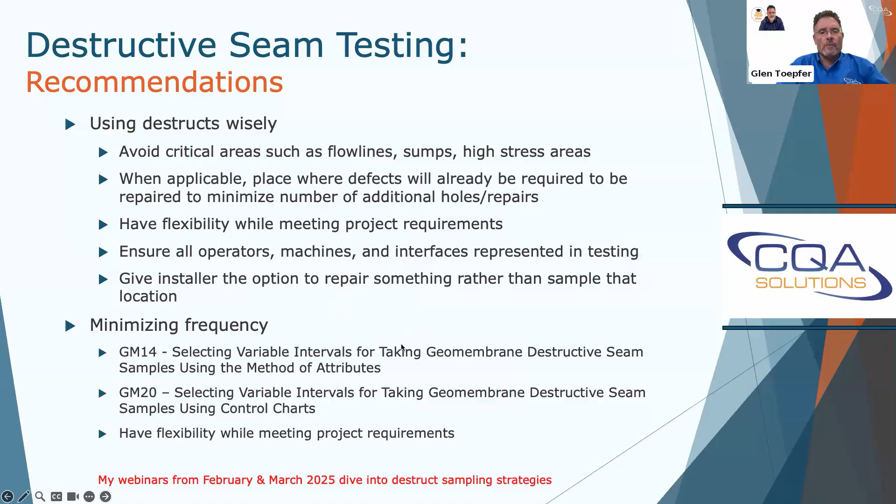Minimizing the frequency, we see GRI GM14 and GM20 help minimize the testing frequency, but a lot of people don't implement those. And you can dive into that more in my webinars last year in February and March if you want to go back to the archives. I could go down a rabbit hole there.

Wrong material and results not recognized. We're seeing where occasionally you'll get results back from labs. Laboratories are human. Sometimes they make mistakes, and you can't just be looking at the results for pass and fail. You have values, the recommended GM19A, 60 mil peel, I think, is 91 if I got everything right there, but assume it's 91 pounds per inch as a requirement.

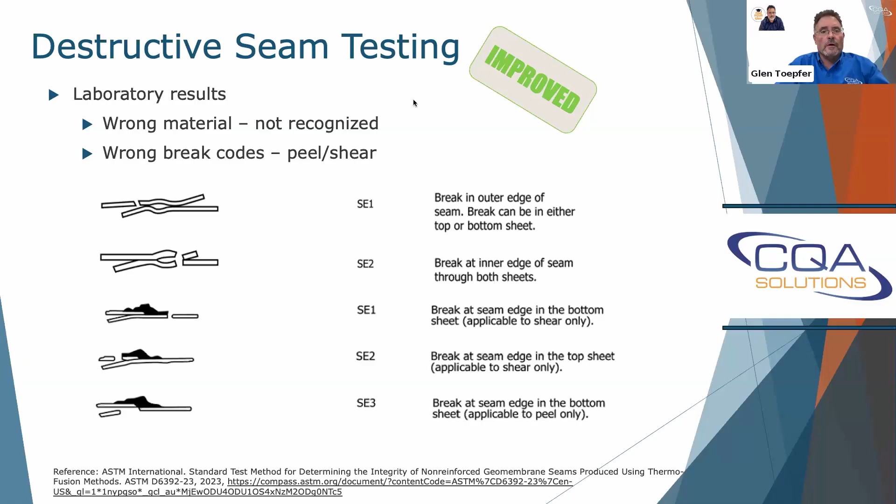You start seeing values in the 150s or 170s or something. You know, that's not 60 mil material. It's stronger than the yield requirements of the material. And it makes no sense, but these things happen. I've caught it where we talk to the lab on occasion and they get it right.

ATV creases, unnecessary damages here. Again, ATVs, everybody has a spec in there about what the low ground pressure should be, what requirement it needs to be. Nobody has a spec other than the ones we've helped write about not driving over wrinkles. And you get these creases and they all should be repaired. They should be cut out and replaced. And these things are avoidable.

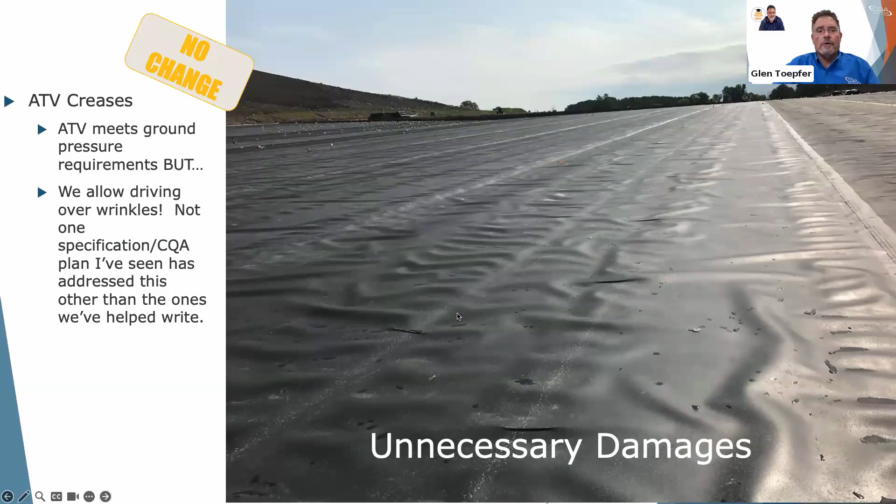Same thing with no rub sheet below the pipe clamp. We're seeing where they lay things on top of the geomembrane, and these pipes are going to move sometimes with pressure, and the liner's going to move with expansion and contraction. But ultimately there's going to be damage there, and people can prevent it, but it's not being done.

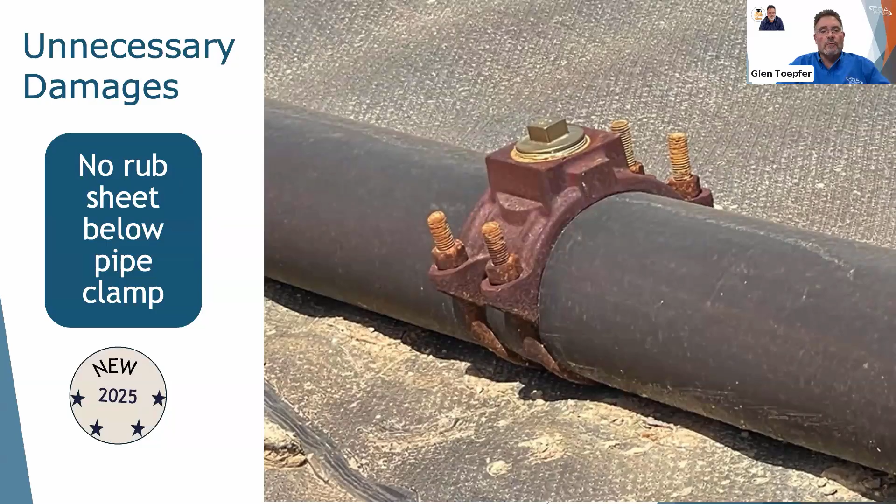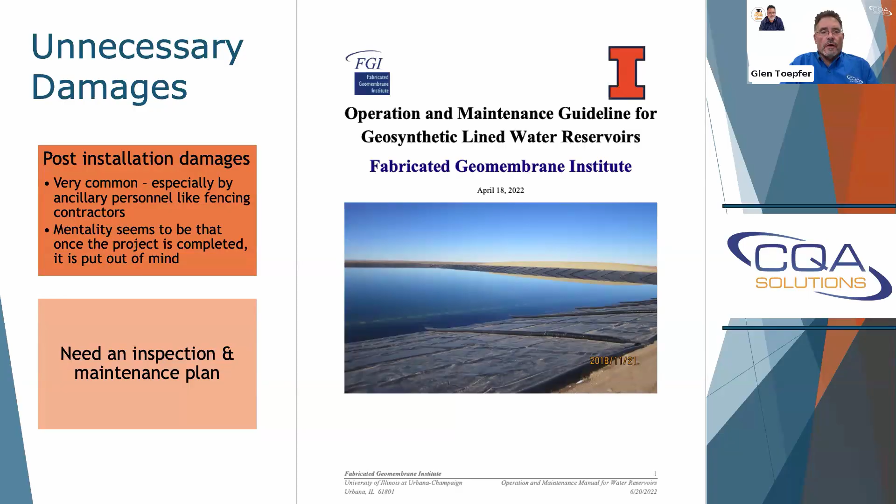Post-installation damages. There needs to be a plan. Fencing contractors are one of the biggest culprits I've seen doing it. So, but an operation and maintenance plan, have some type of follow-up plan.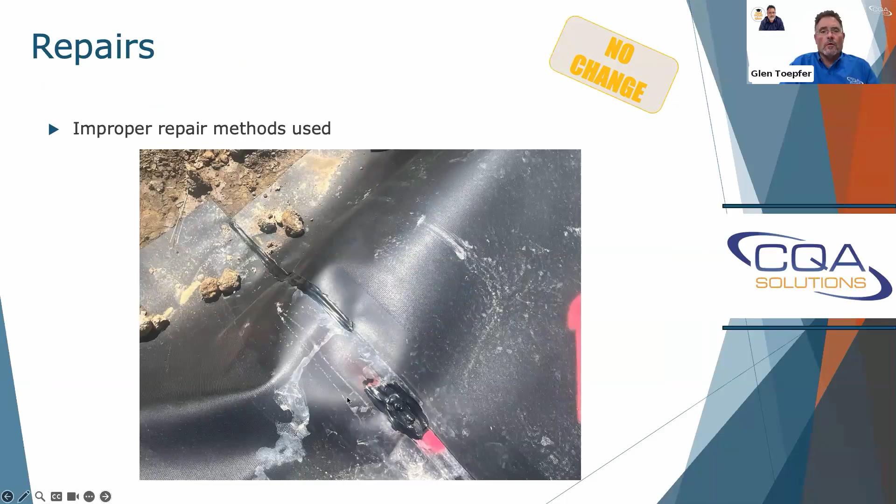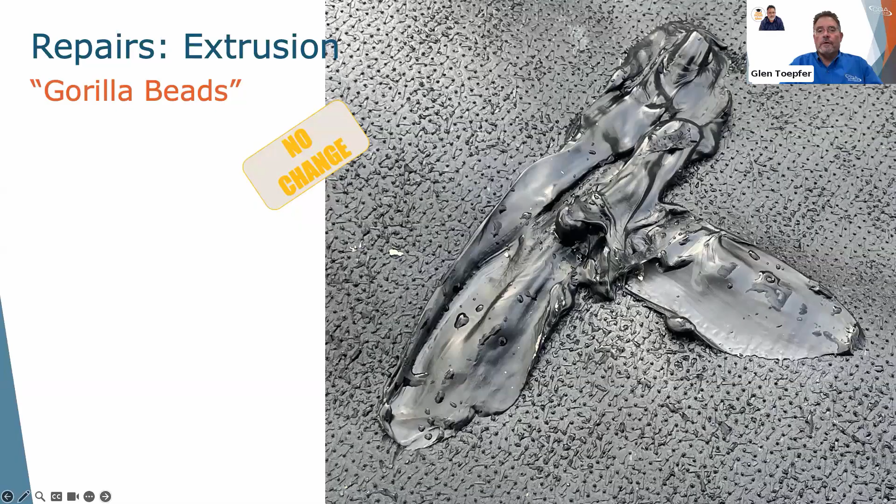Improper repair methods, here they should be not welding on a wrinkle, or they should have put a patch there over the hole. You have improper extrusion methods where they should have cut here and replaced it with a circle cut. Gorilla beads, they're making a patch out of extrudate where it should have just been a patch to begin with. All these things are avoidable. Shouldn't be done. Welding over wrinkles rather than removing. It's another thing that hasn't changed in the industry. We continue to see that.

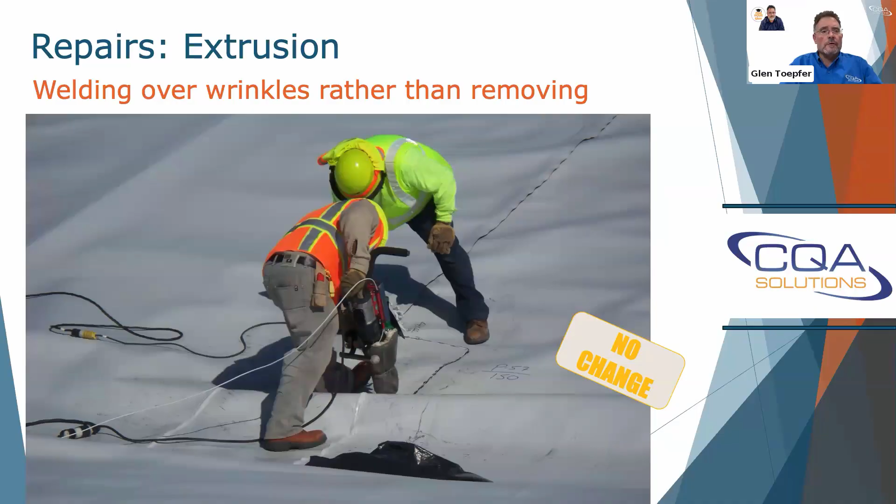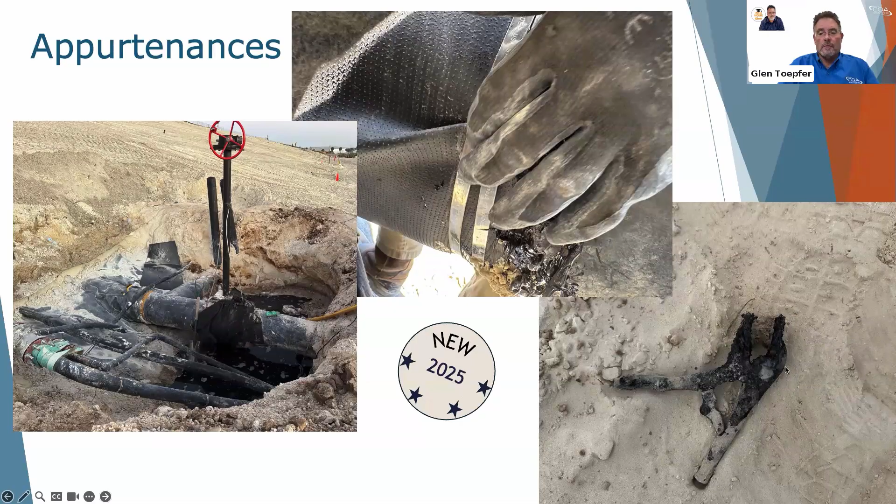A new one this year, working with appurtenances, we were called out to a site to help work on remediation from leaks that were on these pipe boots. And the pipe boots had a lot of issues. And here's a hose clamp. And guess where that hose clamp was found? It was found inside one of the boots. Over 100 leaks were identified, improper welding, multiple fish mouths, inadequate silicone, sealants, and even a hammer was found in another boot. All those things should be avoided.

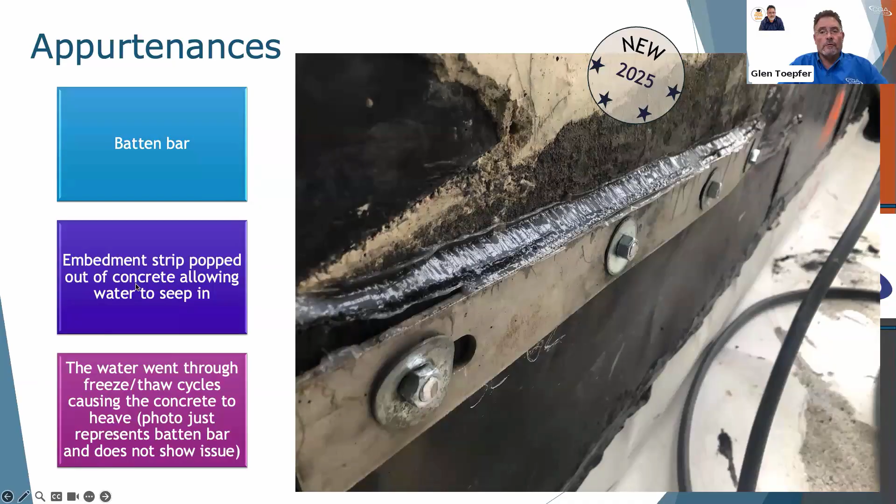Batten strip, we've seen a new one this year. This isn't the photo of it, but the batten strip was not constructed properly or something. The concrete heaved and allowed water to seep in, and then it heaved worse because of freeze and thaw cycles. So not sure what the problem was there, whether it was the manufacturing or design, but something was amiss there.

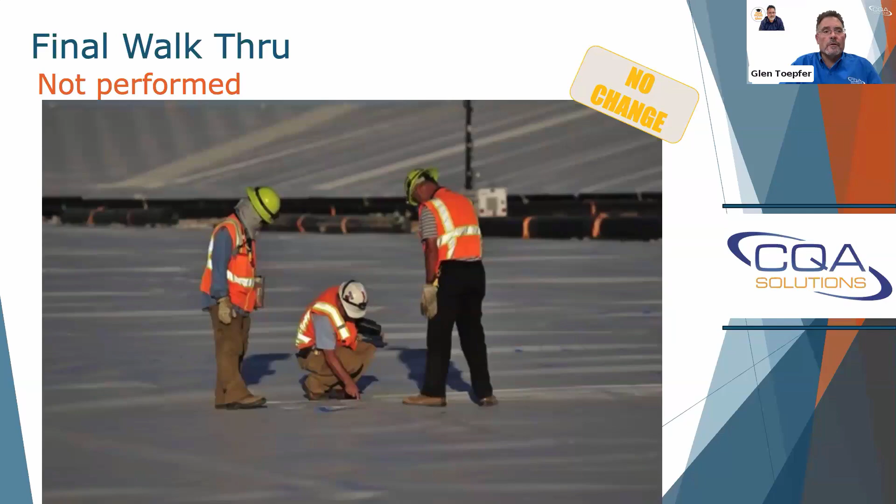Final walkthroughs, they're not being performed. That's one of the big things in the industry. You want to make sure that all your materials are properly installed before the next layer is put on. And we're seeing that final walkthroughs are few and far between.

Daily field reports, they seem to be worse this year when we're looking at them. There's a lot of missing daily field reports. Those days they worked, they did stuff. There's no daily field reports for them, and don't understand how. Lack of relevant data, conflicts with field data, photographs are lacking, or they even contain damaging information and they're still in there. ClosureTurf I had talked about earlier, which way the tufts go.

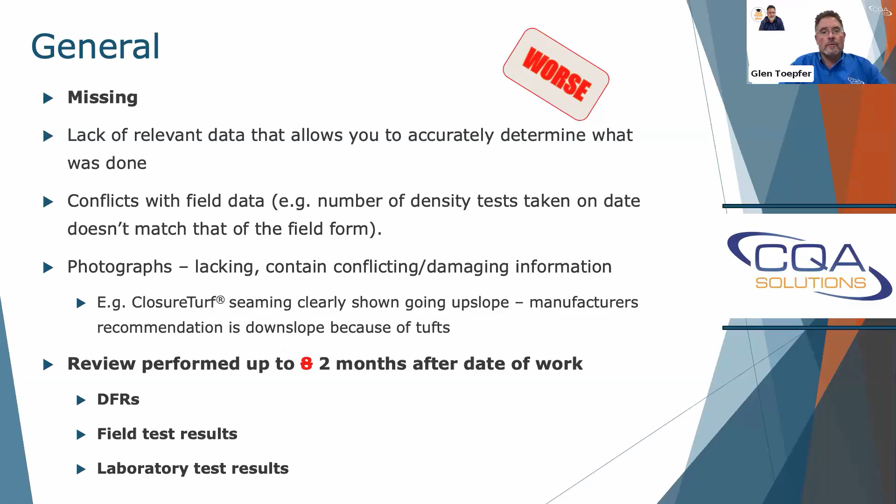And review, that's a big one. We've seen in this case, last year it was 8 months that we had seen the review was performed up to 8 months after the date of work. This year, the worst case we've seen was 2 months. So it's improved, but it's still bad. It needs to be done daily.

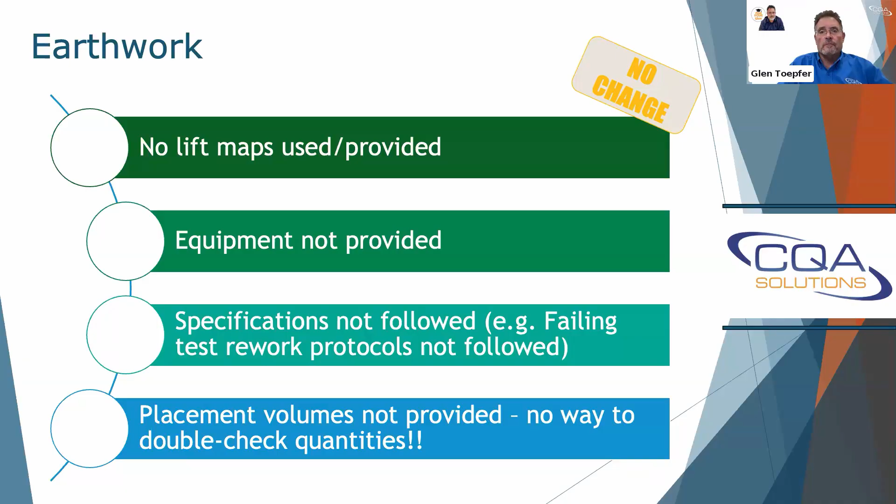Earthwork, in the field reports, no lift maps, equipment's not provided, specifications aren't being followed, and placement volumes aren't being provided, so there's no way to double check quantities, no way to double check that you're using the right amount of proctors. And I don't know why engineers and regulators aren't asking more questions in this regard. Geosynthetics, no descriptions of the processes used. Again, no quantities, no seaming, no material.

And then, there's this big trend, all or partial data is obtained solely from the installer for CQA projects. And there's even projects where CQA personnel only record part of the data. And it's just problematic. How can you track anything if you only have part of the data? How can you ensure it? It doesn't make sense to me.

Weekly meetings, no one has a clue of the material quantities placed. I mentioned that one before. No one's tracking quality indicators. What's our pass fail rate? How much material has been placed? Do we have any trends that are concerning? So we suggest using a weekly summary report.

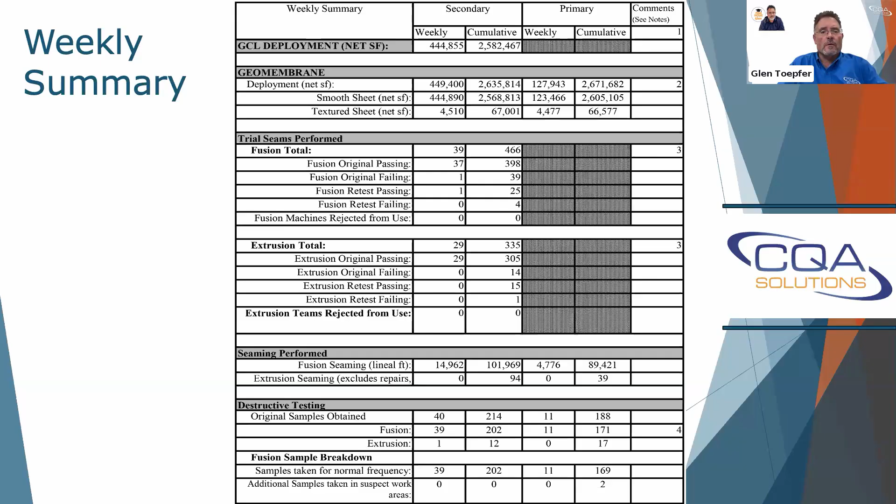I'll just kind of go over that real quick here because this is the same as last year. But this is a weekly summary report. You have your materials, trial weld, seaming, destructive testing. You analyze it, look at the breakdowns, look at your failure rates, number of repairs performed, lineal feet of repairs performed. Your vacuum testing. How many leaks are you seeing on your vacuum testing?

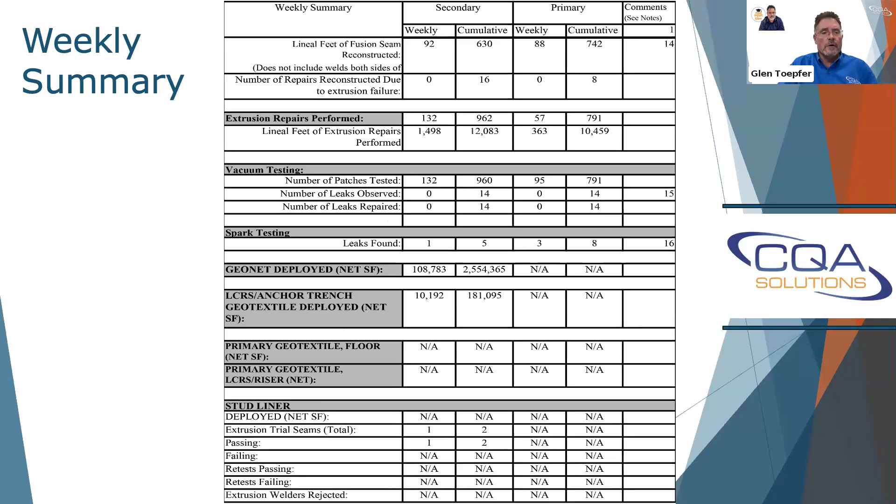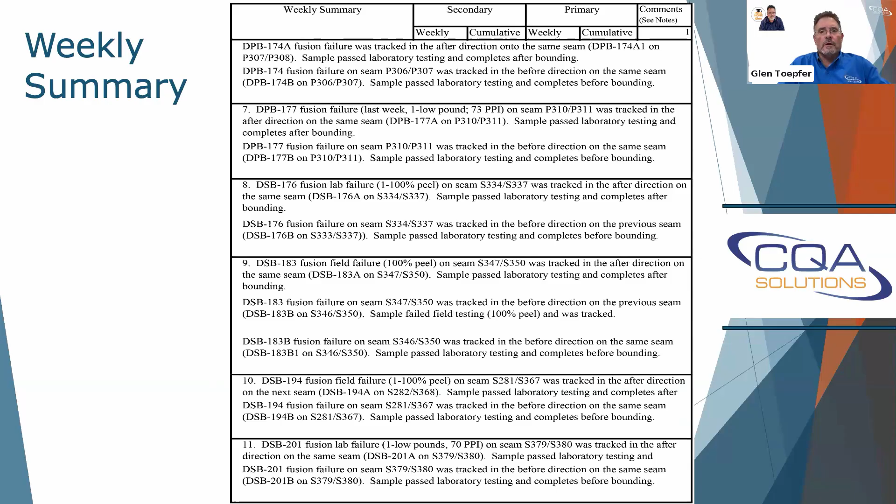Typically, you should be finding some, or they're not doing their job more than likely. But if you start getting excessive, it's a concern too. In this case, it was conductive sheet, so you have spark test. You're documenting all the details, and then notes about why material was rejected, what was the cause of destructive failures. All these things are important to make decisions on, and I'm just kind of scrolling through them.

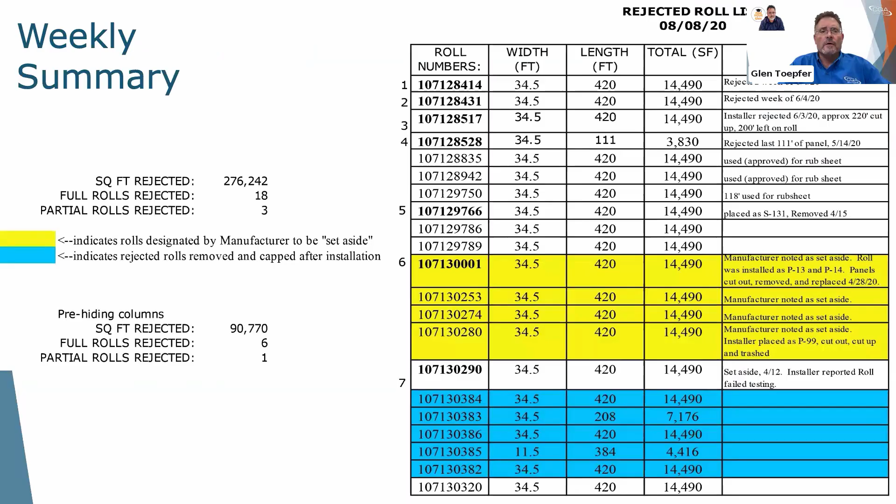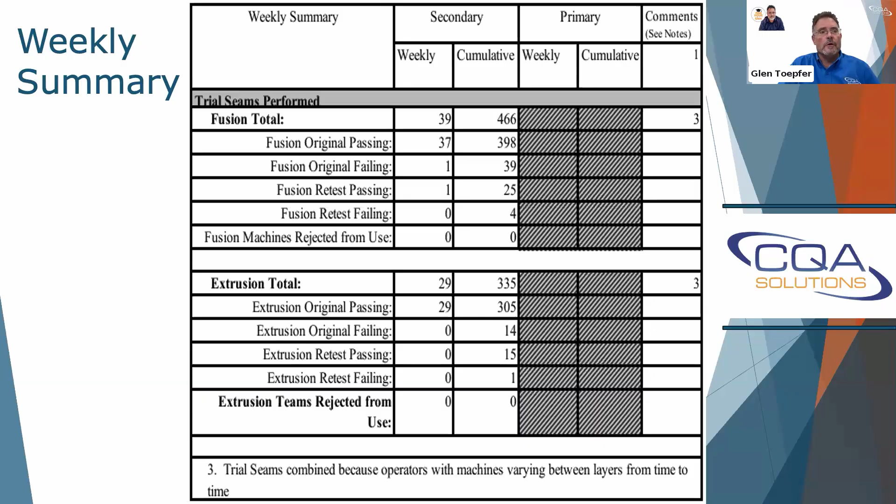Here's a couple close-ups. I'm not going to go into them because we're running out of time, and I want to see if anybody has any questions, which is part of the reason I wanted to put these near the end. And certification reports is where we'll really finish up here. Certification reports haven't changed much.

We review some where the narrative doesn't match the contents of the report. Wrong cells, wrong procedures, wrong materials, missing things, incomplete. They'll contain any of the issues discussed today, but there won't be any remediation for them. It's just put in there like this was part of the process. And I'm surprised more projects aren't being rejected because of some of this stuff. And then the certification statement is signed and submitted to the client and/or regulators with information like this. And I don't understand that myself.

But anyways, that's what we've seen this year. I think there's a lot that we can improve on. I'm hoping that when I do this again next year, we'll have some improvement to report. We did have a little this year, and I think we just need to help each other and work together to raise the bar in the industry.